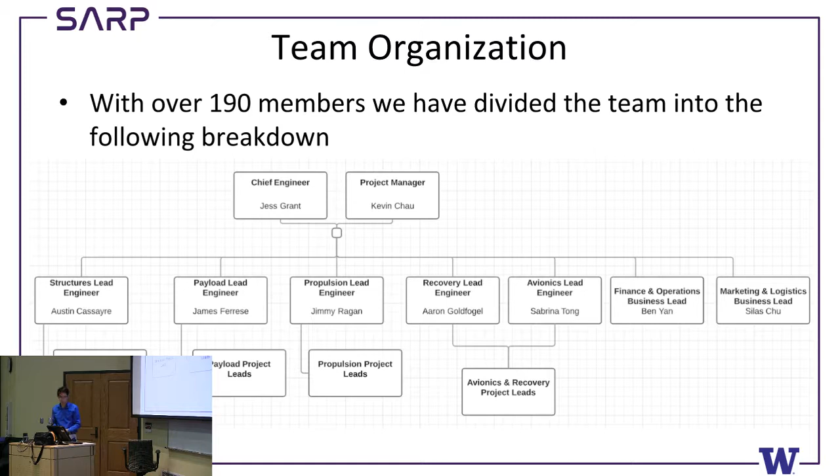For this year's team objectives, team requirements are dictated by IREC, such as reaching a target altitude of 30,000 feet, limited to a Class 2 amateur rocket. Also fully student research and developed hybrid motor, full tracking systems, CubeSat scientific payload of 8.8 pounds, within the normal CubeSat units of either 1U, 2U, or 3U, 10 by 10 by 10 per U. Also a minimum stability margin of 1.5 calibers.

The overall team goal is to have fully wireless launch operations, and this year we're doing a 7.9 inch rocket diameter. Dimensions are about 13.25 feet length with 7.9 inches in diameter, dry weight of 120 pounds, and wet weight of 170 pounds. For wet weight, that's basically the nitrous and solid fuel added on top of the dry weight. We also have a target thrust of 1,200 pound force.

This is a brief overview of our general team schedule. Right now we're in week 10 of fall, which is for PDR and some senior capstone integration, so we're basically on time. Manufacturing will continue through winter till halfway through, then more testing and integration throughout all of winter. CDR may or may not happen this week, depending on how the following designs go and test launch windows, then IREC prep after that for later spring quarter. This year, since UW ends the year a week later, after week 10 we're basically heading down to IREC, so we don't have that extra week to do more IREC prep work.

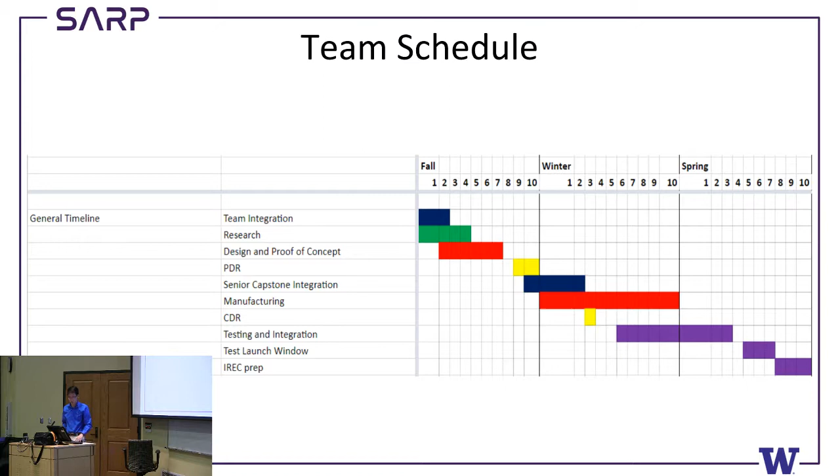So now on to structures with Austin Cassayre.

Sounds like the microphone's working. All right, so I'm Austin Cassayre.

I'm the structures lead this year. Just a quick overview of some of the requirements that we have. From IREC, they basically just want us to make sure that we fully analyze the structure and make sure there's not going to be any surprises in terms of failures, things like that.

COPV is a joint project between Propulsion and Structures that's going to have a special case scenario because COPVs just started being used in IREC last year. Some of our own goals for this year: we set a minimum factor of safety of 2 for all of our components. We also want to integrate effectively with all the other teams, no problems, which makes it easier when we get to assembly.

Some of our research and development projects this year that are big: the composite overwrap pressure vessel, COPV, which will be mentioned in Jimmy's propulsion slides later, and the composite couplers, another big R&D project we're working on for weight reduction.

So just a quick design overview of the rocket. Almost everything you see on the outside is structures. We have the nose cone, the payload coupler, and the parachute inside the upper body tube, both the drogue and the main chute. We have the recovery coupler, which houses the oxidizer vent valve, the main body tube, which covers the oxidizer tank, and the actuated valve bay in between. Then we have the fins mounted on the fin can and the tail cone at the end.

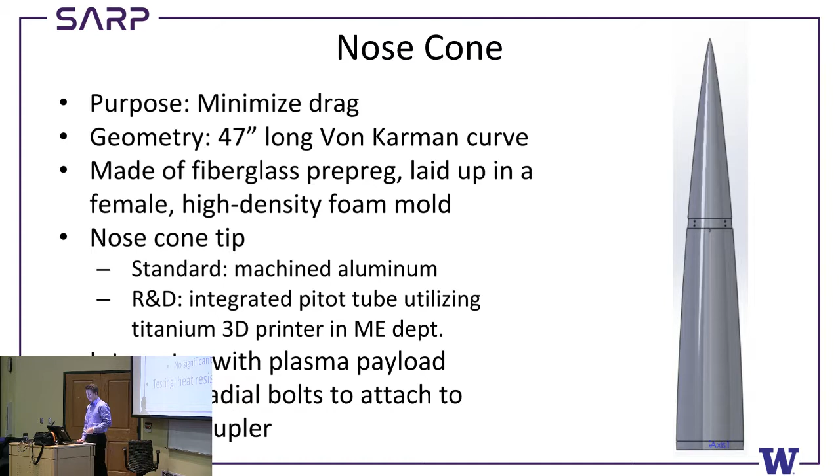As part of integration with payload, there's going to be some holes in the nose cone to hold on their electrodes, and also very small holes for their wires for temperature sensors. We don't anticipate these holes to be an issue structurally, but we are going to run some FEA. We just haven't done that yet.

No issues anticipated there. As far as testing goes for the nose cone, we are going to take the material after we cure it and expose it to extremely high temperatures, in case the plasma heats up the surface a lot, which we don't anticipate too much, but we want to make sure the nose cone doesn't catch fire. So we're going to do testing for that.

And we'll do wind tunnel tests to verify that the geometry we chose is the optimal choice.

The payload coupler, right underneath the nose cone, houses the payload. It has mounting bars in there for it. It also has CO2 canisters for the nose cone ejection, which separates the nose cone and allows the parachutes to come out, and it has the hard point for the drogue chute on the aft side of the bulkhead.

The bulkhead and the sleeves will be machined from aluminum and welded together. The welding will be done professionally, as is the case for all of our welding. The payload mounting bars will be made out of carbon fiber to make them a little bit lighter, and there's going to be a 1/2-inch eye bolt for the mounting point for the drogue chute. There are 2 current CO2 canister configurations.

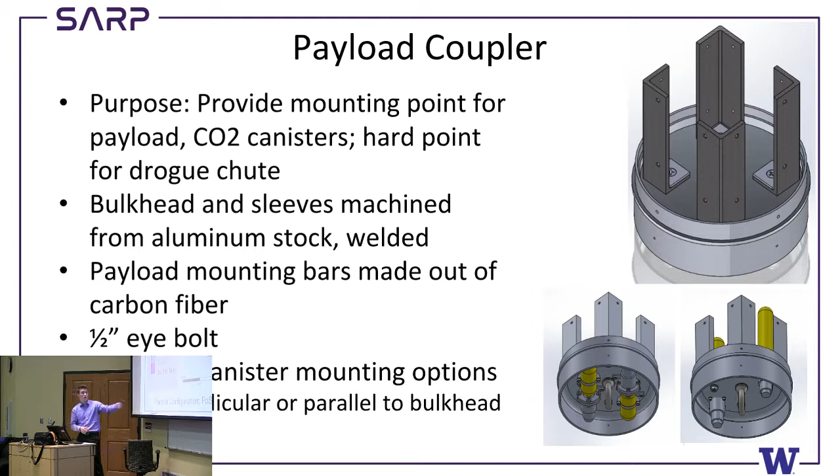There's perpendicular, which is on the right, and there's parallel, which is on the left. We've run analysis for both cases. The parallel configuration has more holes, a little bit smaller, and the perpendicular has 2 larger holes for the CO2 canisters. Both check out above our minimum factor of safety of 2, and the perpendicular one actually shows up a little better. The highest load here is the drogue parachute load, 360 pound force. That's what this is done for, using von Mises failure criterion.

Our airframes - we have 3 tubes that we make. They're all carbon fiber, and they are the aerodynamic surface of our rocket for the main tube, and they also hold a lot of parts together. The top one you saw was the parachute bay, and then we have the Oxidizer Tank shroud, which will be load-bearing this year. The fin can, depending on geometry, will be made the same way, and we'll talk about that later.

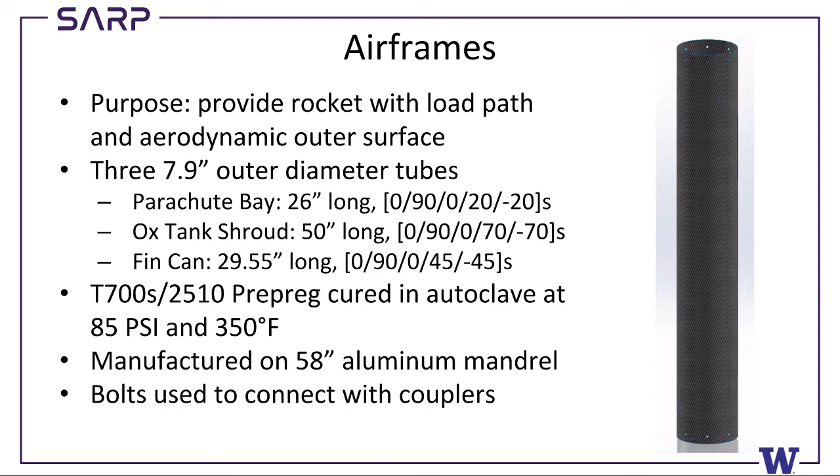The material we use is Toray T700S fiber with a 2510 resin system. It's pretty strong, works really well. We've used it in years past. We use an aluminum mandrel, just a big circular tube that we hand lay these tubes up on. That method is practiced and proven. All of these tubes are connected to all the interfacing components with bolts.

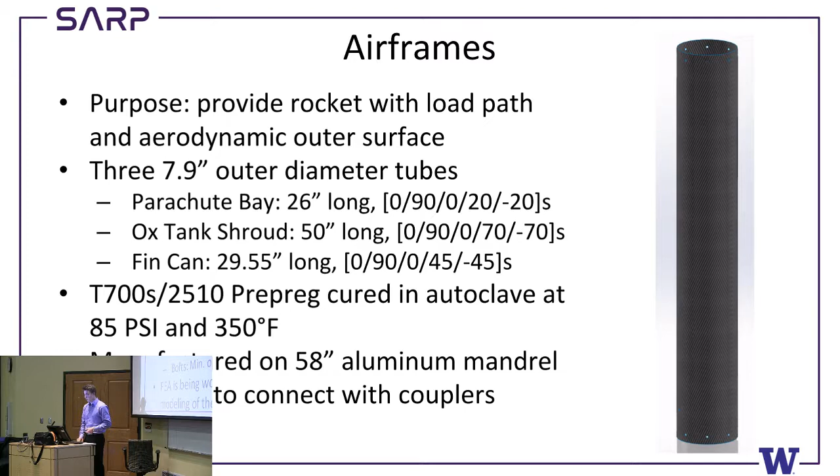As far as analysis for the tubes goes, we have done some FEA with composite ply stack pattern, and we're working on developing that more, but most of our analysis has come from classical laminate theory. As part of our composites course, we've developed a code that analyzes various stack patterns, and we've used that to show that moving away from our traditional 0, 90, 0, plus 45, minus 45 stack patterns helps. Those numbers correspond to the angle of the fiber relative to the 0-degree axis of the rocket, and the direction of the fibers is what takes the load mostly.

By moving away from those plus minus 45, since these tubes don't really have a lot of torsional load, we were actually able to get a higher factor of safety. The upper body tube sees mostly axial loads, so we move those fibers to the plus minus 20 direction. For the main body tube, this is something we're still working on.

You'll notice we have this internal pressure factor of 1,000 psi. Part of that is with the COPV - there's going to be a bonding surface, which you'll see in those slides later, between the COPV and the inside of the Ox tank shroud. It's not a complete contact surface throughout the whole length, but we're not exactly sure how to translate that internal pressure, which is really 800, and we're still working on that FEA to determine how that loading will translate to the tube. So to be conservative, we threw that in there, and we still come out above our minimum factor of safety of 2.

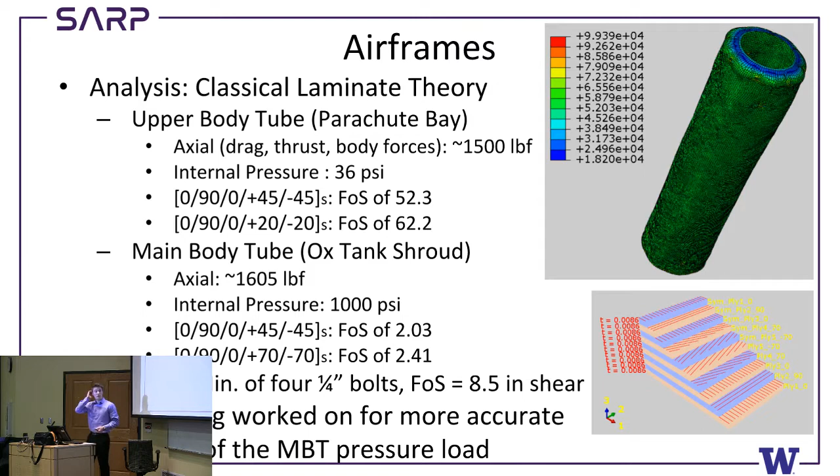Recovery coupler. This has the main parachute hard point, so there's a large force there after deployment of the parachutes. The bulkhead and cage for this are also machined from aluminum and welded together professionally. We will have 3D printed doors, which have worked great the last 2 years. The unsupported column length, which we'll get into on the next slide, is 8 inches for this current design. The eye bolt is 5/8 inch diameter, so it's pretty hefty.

Last year, the mode of failure was buckling in the recovery coupler, so we wanted to make sure we're safe in buckling this year. We used Euler's critical load buckling theory to calculate a factor of safety of 9.4. This L is that unsupported column length we talked about in the last slide, and K, because this is one solid part, we technically have fixed ends, so we're putting a value of 0.5 in there. E is elastic modulus, and I is the minimum moment of inertia for the column.

To verify that with FEA, we calculated similarly successful factors of safety for all the components in the different loads. It shows a little lower in compression, but our max stress is actually right up in those corners, so we'd expect the material to yield there first before the column buckles, which would probably result in the column buckling as well. But again, we have a large factor of safety there, so we don't anticipate getting to that point.

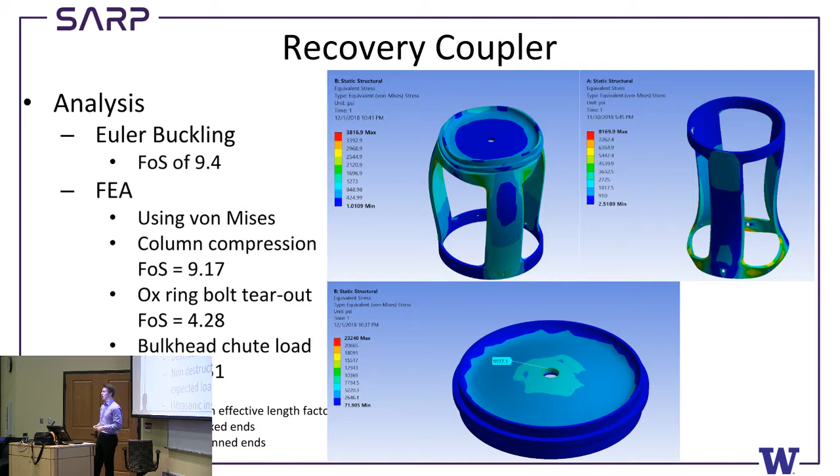So one of those R&D projects I mentioned is composite recovery couplers. This is just a weight savings thing, very R&D at this point. We'd basically be replacing the cage of the recovery coupler with carbon fiber, manufacturing a tube the same way we have in the past, and adding stiffeners on those columns. One consideration we're still working on is making a bulkhead that takes the 1,800 pound force of the parachute load, which is giving us some difficulty. So the backup plan is to still have an aluminum bulkhead, and the conversion from the aluminum cage to the composite cage will still give us a lighter part.

This would require a lot of mechanical testing, some destructive testing, and then proof testing before we would ever put it on the rocket. The fins are our major stability, our major control surface.

We have 4 geometries that we've chosen, which you'll see on the next slide. We again used OpenRocket to determine these geometries. There are 2 options basically for the fin can, which is just the tube the fins are connected to: a cylindrical fin can, and also area rule. Area rule is if you take a look at the cross-sectional area of the rocket along its length, you want to keep it completely constant, and if you do that, your drag over flight will be significantly less than if you didn't keep it constant.

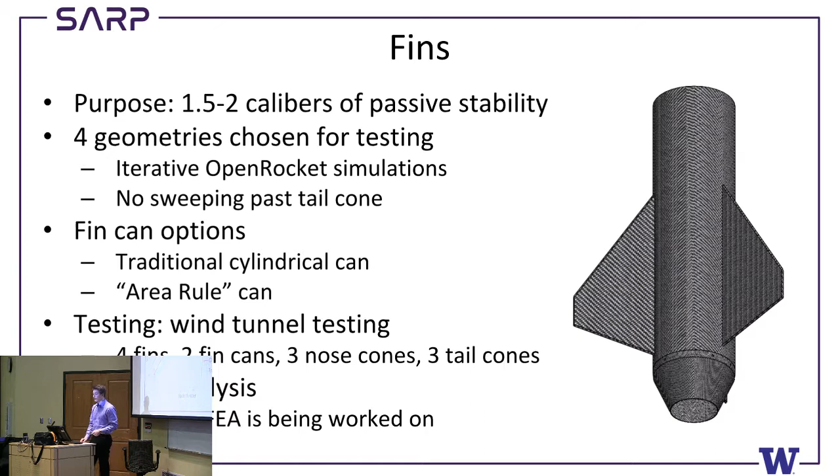So when you get to the fins and add that extra area, you actually have to choke down the diameter of the fin can to keep that area constant. We'll be doing wind tunnel testing to verify which fin geometry is best, and in addition, we'll be throwing in the 2 different types of fin cans, a couple different nose cone geometries to verify that the one we chose was right, and a couple tail cones in there too. CFD and FEA are both being worked on for the fins right now. Currently, this Delta 2 shape is showing the lowest amount of drag and the highest apogee for the rocket.

For manufacturing the fins, we have a honeycomb or foam core, overwrapped with carbon fiber. The 2 options essentially come down to making a fin can, whether cylindrical or with the area rule with a slight waist, and bolting those fins onto the can. It's something we used last year that worked pretty well. If you notice, there are some aluminum inserts inside this foam core from last year, and then they bolt into the tube like that.

There are 2 methods of making the area rule fin can: either this male mold option or this female mold option. You can't really see the area rule curvature that goes into the depth of the page here, but these are the 2 options we're looking into, and we've talked with some of the shop masters over in ME and with some of the professors here, and we seem pretty confident with that.

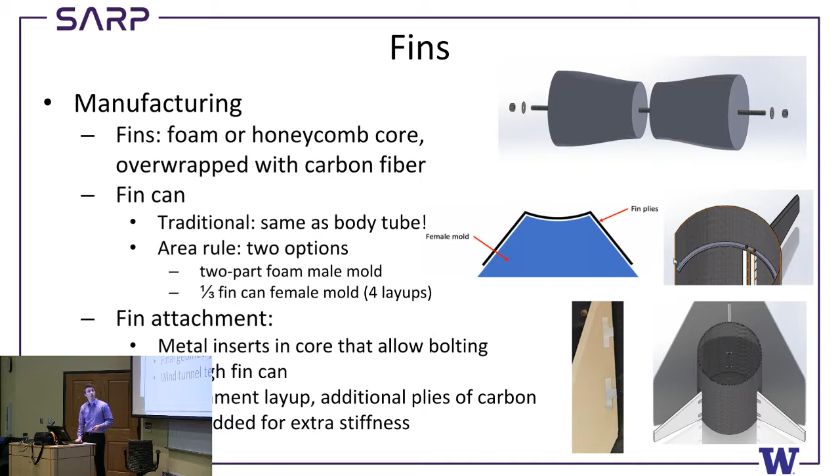So tail cones, the last part we have - the purpose is just to reduce drag again, and they're also made of carbon fiber on a foam mold. A male mold will work too, but foam's probably what we'll end up using. This integrates with the nozzle, so it's pretty much constrained to the nozzle geometry. This transition length is just the axial length from this point to that point.

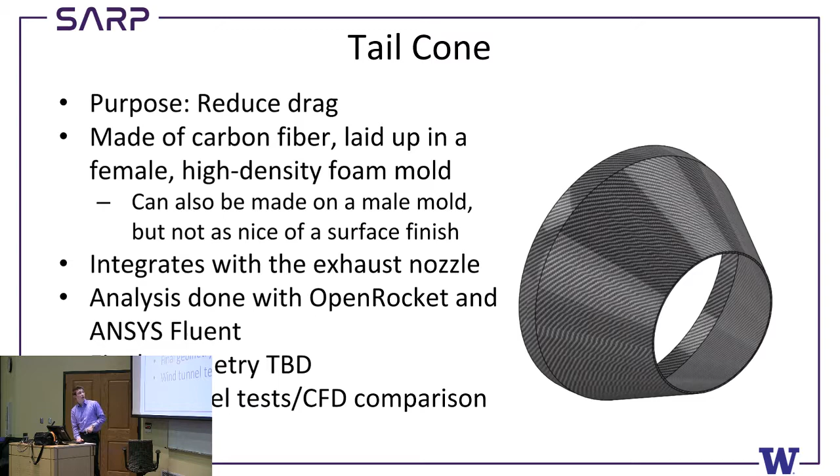Moving forward, we will have all of our analysis complete about a week or two after school starts next quarter, and all testing that would result in design changes will certainly be done by early February. CDR is scheduled there for everyone.

Manufacturing, this includes some backup components that we want to manufacture, and that'll all be done by the end of winter quarter. Proof testing would be after we create those parts before they fly. We want to do proof testing on all of our parts, just 1.5 times expected load in the Instron machine or something for compressive or tensile loads, whatever that may be. Then we hope to do some ultrasonic inspection on our carbon fiber parts, but we have to find someone that can do that.

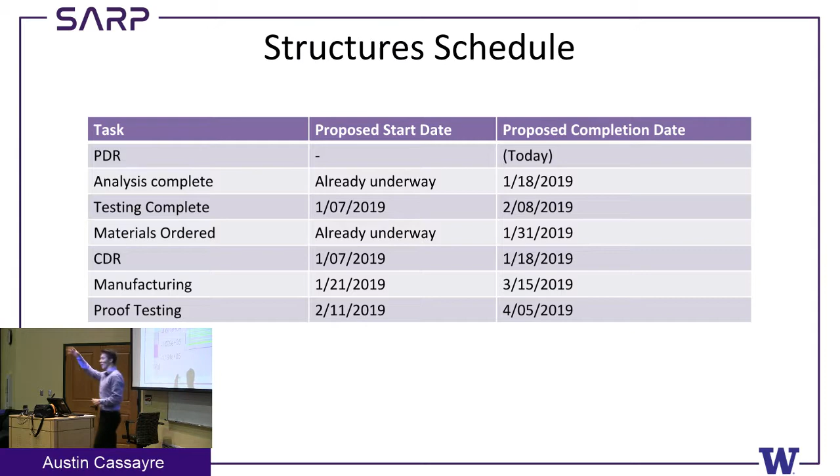Why do we move away from the swept fins? That's a great question. If you look here, you'll see these fins go past the tail cone. They look really cool, but as the rocket comes down on a parachute, it lands directly on the fins and they break. So in an effort to not remake the fins every time we want to do a launch, we are moving the fins so they don't extend past the tail cone.

Any other questions? How do we plan to attach the titanium tip? That's referring to the nose cone. We plan on epoxying it mostly, and that should hold fine, but we will also be looking into potential bolting designs, such as last year there was a piece of all-thread that hooked into a platform that sucked up into the inner side of the nose cone and held the nose cone tip on. That's something we're also looking into, because there will be some electronics that need to be hooked up to the pitot tube to collect data, and that would be a good opportunity for us to mount those there.

So, the question was: will wind tunnel testing be done with a full-scale model or a subscale model? It will not be with the full-scale model — it's a pretty large rocket to throw in the wind tunnel. However, the test model is larger than last year's. Last year's was about this long, and there were a lot of interactions between the test stand and the model in that instance. So we're moving up to a significantly larger test rocket that's 5 feet long — a lot bigger, but no, not full scale.

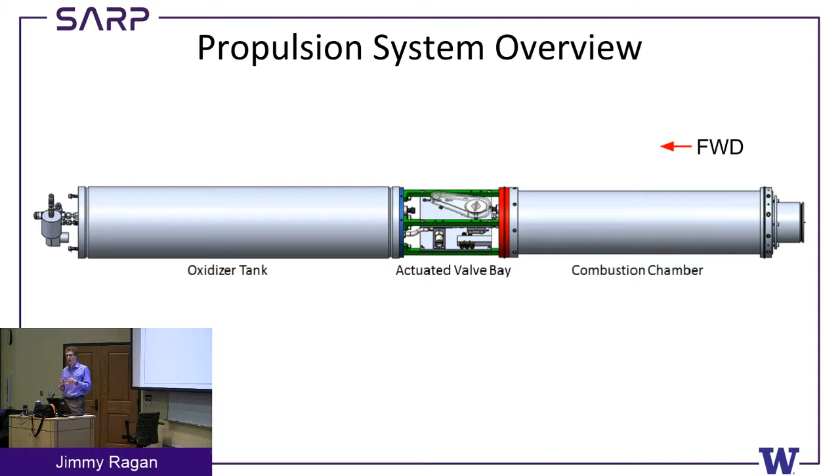So without much further ado, let me get into the design requirements and start talking about what we're trying to achieve here with the propulsion system.

Our total impulse is 9,200 pound-seconds. That's a requirement, the upper limit of what we can do at IREC. That's the top of the O-class motor. So we're limited to that by design, where our design limit is imposed by competition. We could go higher if we wanted to.

Similarly, we have to use non-toxic propellant as well as keep our pressure vessels at a factor of safety of 2. Again, IREC requirements for both of those, as well as achieve a stability of 1.5 calibers of static margin off the rail, which is how IREC defines a stable rocket.

To do that, in past years, we've needed a minimum peak thrust of 1,200 pounds. That's based on last year's weight. So if all the weight saving efforts that Austin and our team are trying to implement go into effect, that number might come down a little bit. Alternatively, we could shorten the launch rail.

We also ourselves have elected to impose a minimum factor of safety of 1.5 across all parts. That's not our IREC requirement, that's just something we're trying to achieve, although most of our parts in the load path are quite a bit higher than that. This is just for things where it's an extremely conservative estimate that we're trying to reach at least 1.5 on.

So some design goals, as always, and as every team's trying to achieve, we want to make things lighter while maintaining the same level of reliability and our factors of safety. But we have two new design goals for this year: we want to have a subsonic trajectory, as well as be able to use a composite overwrap pressure vessel, or COPV, which means we need to be compatible with both our normal aluminum oxidizer tank and that new composite oxidizer tank.

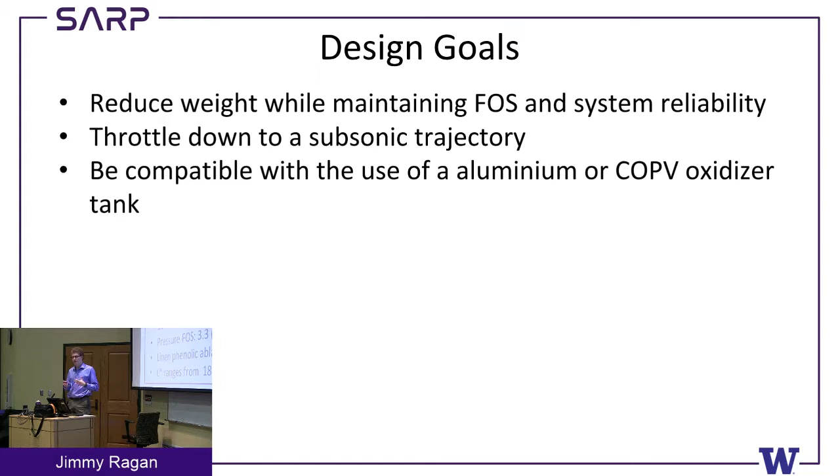We also have a factor of safety of 3.3 on the aluminum combustion chamber, which is the outermost part here, although there are other factors of safety on the other components inside that I'll get into later, if you were to model them as a pressure vessel with no support. We assume a combustion chamber pressure of 500 psi for that calculation, although that's a worst case scenario, and we haven't actually detected much more than a pressure spike at that level.

Our thermal protection is a linen phenolic. That's something we've selected and continue to use based on our flight heritage, although we are working on programs to get out of phenolic and into something a little bit cheaper, and I'll go into that in a couple slides.

Finally, our L-star ranges are pretty similar to previous iterations. That's because we've had a lot of success with these values, and until we get a little bit more time to go and make a more thorough model of our motor, we don't really want to deviate much from this. So that was one of our design constraints: we want to keep our L-stars about the same as they were in previous years because that has had flight-proven success.

Going through the high-level parameters of our motor, we're trying again to hit that 1,200 pounds of thrust, and we do that with 3 pounds per second of oxidizer flow and 1 pound per second of fuel, for a total of 4 pounds per second over a total burn time of 12 seconds, which is a bit of an increase over previous iterations.

That does mean we're running at an oxidizer-to-fuel ratio of about 3, which is pretty fuel rich, but that's by design. We've shown better performance when running intentionally fuel rich, and it also keeps our system from being exposed to the oxidizer directly.

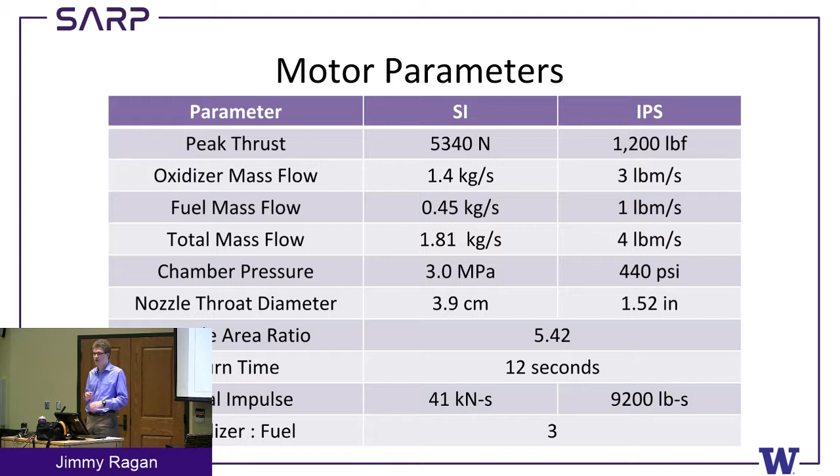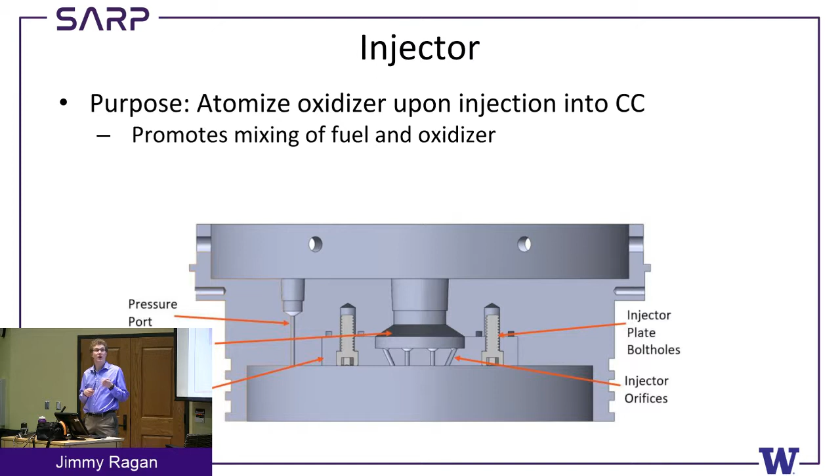I should note that how we determine the quality of our injector plate designs is mostly empirical. We have a couple designs, and I'll show a candidate replacement on the next slide. What we do is run CO2 through it, which is a pretty accurate substitute for nitrous, not reactive, and a lot cheaper. We run that through our injection plates, observe the resulting plume, and basically come up with a qualitative judgment on which one's mixing better, which one's atomizing better. It's mostly an experimental process there.

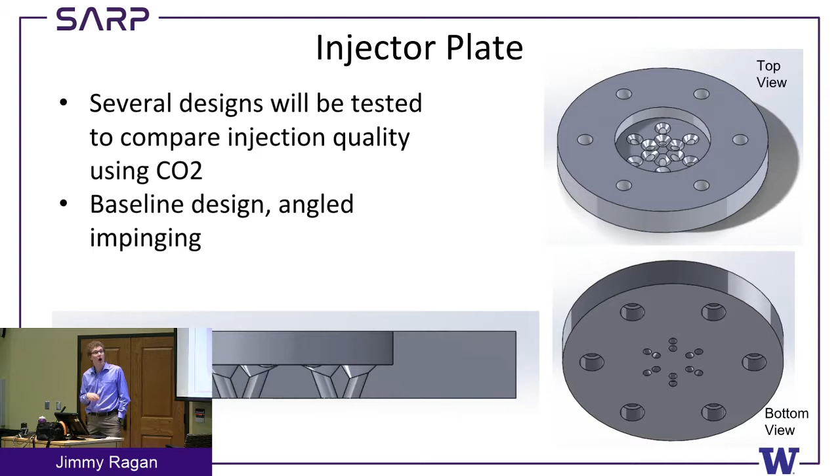Going to the exact opposite end of the combustion chamber, the exit instead of the entrance, we have the nozzle, which is made out of graphite. This is again something we've had a lot of history with and success using, as graphite nozzles are somewhat ablative but also pretty resistant to the high temperatures of our combustion.

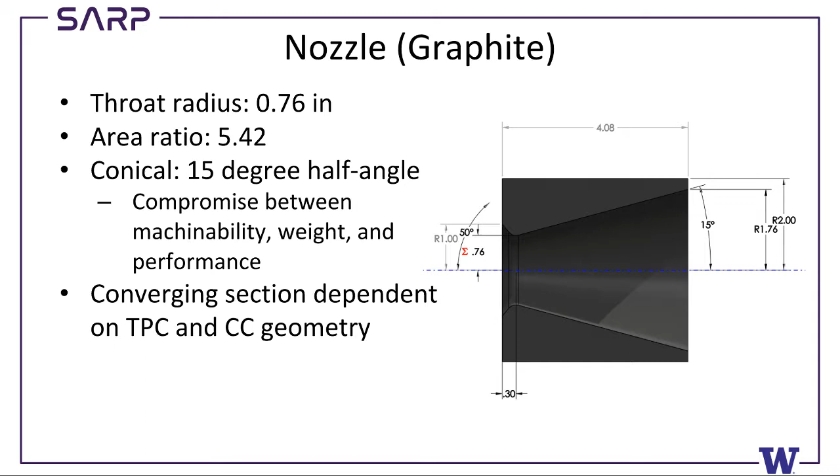I should also note that we have pretty much completely replaced the converging section with thermal protection, which is the next slide. We do this for a couple reasons - the primary one is that's the location where temperatures are hottest in the nozzle, and it's also the location that's going to see the most ablation. So we intentionally replace this with thermal protection so we can have something expendable each fire, and we're not having to replace the entire nozzle over the course of our testing cycle. Ideally we would only make one nozzle per year, and that's what we did last year, and it worked pretty well.

We did make a couple changes to this converging section, mostly that we made the converging rate somewhat shallower to help match the tangency of that angle and the nozzle. If you look really carefully at our assembled CAD, which will be in the next slide, you can notice there's a slight angle discontinuity there, and we wanted to minimize that. However, we were also constrained by the fact that we have a lot of 1-inch thick phenolic stock, and we wanted to reuse it, so that's why we ended up with this result. Note that it's a pretty aggressive converging rate, but literature backs up that this isn't actually a significant concern, so we're keeping it as such a rapid convergence while keeping the divergence at a 15-degree half cone.

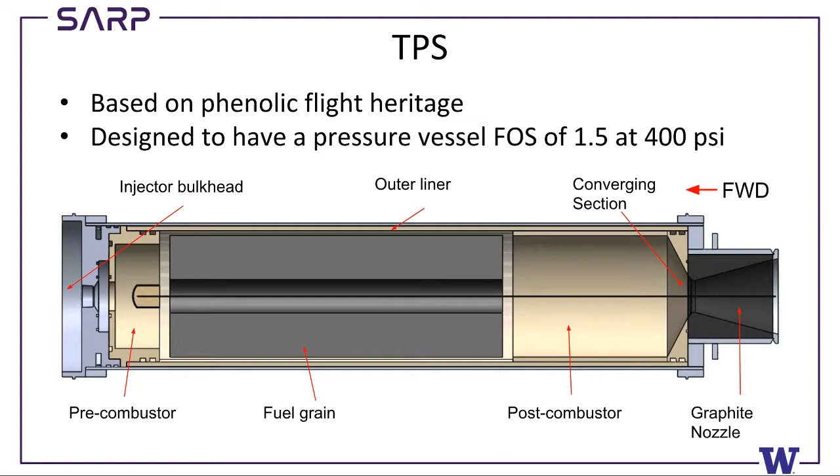It should be noted that we seal our combustion chamber's heat shielding with O-rings here and here, which does create a pressure vessel. So we have performed analysis and have a factor of safety of 1.5, using the closer combustion pressure of 400 psi. Note, however, that this is a pretty conservative estimate because it assumes no support from the combustion chamber on the heat shielding, which isn't true in actuality. We've intentionally made this decision because we've noticed in previous years that our main failure mode for this heat shielding is gas paths leaking out, usually in the precombustor region, and not due to pressure failure.

So we've intentionally blocked that gas path and accepted the pressurization of the heat shielding. It's something that has worked pretty well for us in previous iterations, so we're keeping with it.

However, probably the biggest issue with our heat shielding is the fact that the precombustor is fairly expensive and time-consuming to manufacture. Part of that is due to the fact that it's made out of phenolic, which isn't a very cheap material. So one of the things we're looking into this year is replacing the phenolic in the precombustor with a different substance, in this case wood or wood composite. The reasoning behind that choice is that wood has similar ablative properties, especially certain composites of it, and some of them use phenolic resin to make the composite. So we believe that we can come up with a cheaper alternative and something that's a little bit easier to manufacture that can achieve the same results.

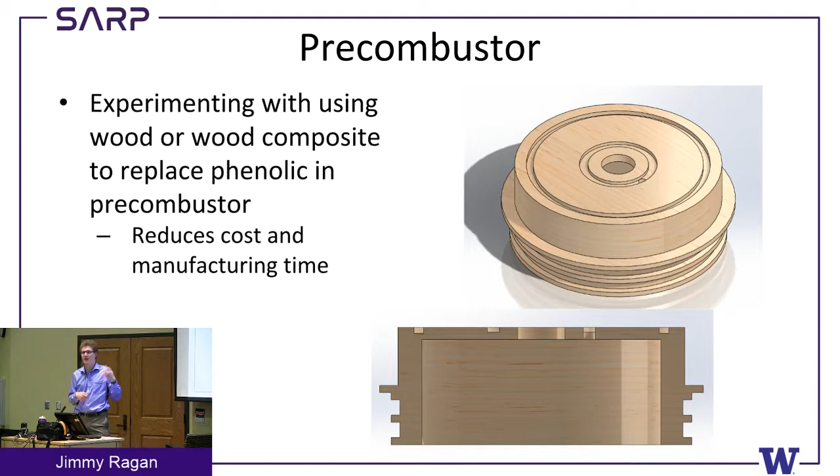So it's something that we have yet to design a test to actually compare the two, but it's something we'll be doing in the winter. We're making a precombustor out of phenolic and making one out of wood, and then basically subjecting them to the same conditions and comparing their ablative properties. We hope that this will help save time and money in the long run, as well as be more pleasant to manufacture.

Moving into the core of that combustion chamber, the fuels, obviously what makes the rocket go. There's a lot going on in the fuels, but basically the purpose of the fuels is to provide that total impulse while not causing any detrimental instabilities, such as the fuel grain cracking and sloughing off, or other instabilities of it stuttering or going in and out.

We use paraffin wax as our fuel, partially due to our long history and also due to how easy it is for us to manufacture it. And then we mix in various additives to the paraffin wax to create a fuel that has a higher regression rate and higher tensile strength.

How we determine which additives to add is a bit of an experimental process, just like our injector. We have various additives that we've used in years past and that literature has suggested have the results we want to see. And we make a couple different compositions and test them in our subscale setup.

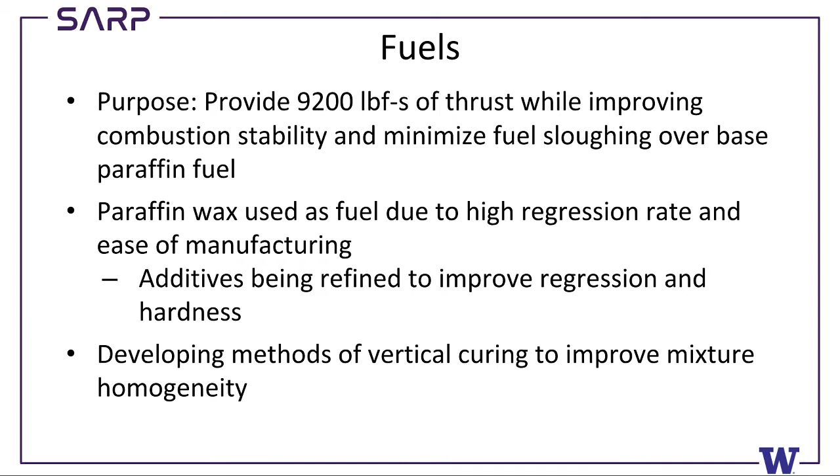One thing I should point out before I go to some of those mixtures is that we're trying to implement vertical curing instead of the spin casting we've done in the past, which is a bit of a step backwards to something SARP had done originally and then moved to spin casting because of detrimental air bubbles. But we have a potential solution to the air bubbles in the vertical pour, and we have noticed in the past that spin forming has resulted in inhomogeneities within the fuel, which has meant that additives have separated to the outside when spun, and we'd like to remove that effect. So we're going to try pouring vertical and see which one is most difficult to work with. We have a couple ideas we want to try out.

So some of the fuel mixtures, there's quite a few of them and there's a lot of additives, so I'm not going to go into too much detail. If people have questions, feel free to ask. But essentially, all of these additives are being added to achieve one of two effects: increase the regression rate, which provides more thrust, or increase the hardness, which prevents instability.

This control composition is what we flew last year. This one is using larger aluminum because we would have liked to use 3 micrometer aluminum, but we didn't have that on hand, and now we have a source. And then this is another one that we've had history with. What we're planning on doing is iterating slightly from each of these controls to see what the effects of adding each additive is. It's building on research that we've done in the past and trying to extend it forward.

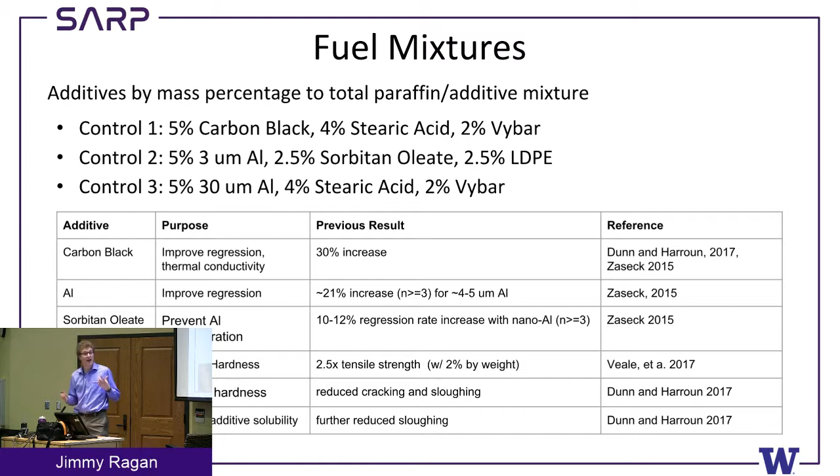So moving outside of the rocket entirely, we've talked a lot about the fuel and what's inside the combustion chamber. How do things get inside the oxidizer tank? We do this pretty much completely remotely. We have a remote fill system that was developed largely last year and the year before that allows us to remotely load oxidizer and pressurize our tank without having any personnel on site, which is a great safety feature.

We'd like to continue using the pneumatic ball valves that were so successful last year, but we'd also like to increase the line size and have a faster fill rate, because that was one of our biggest challenges in competition - the fact that we couldn't fill within a half hour as we would have liked to.

The fill procedure is fairly simple. We initially purge the tank with nitrogen to clear out any oxygen or anything else that could potentially react with the nitrous. We flow nitrous and try to fill the tank to our desired weight - for launch last year that was 36 pounds, although the tank can hold up to 40. Then we back pressurize with helium to achieve the desired tank pressure, which is 800 psi.

For static fires, where the rocket isn't going anywhere, immediately after the fire is finished we purge with CO2 to put out any fires that might be on or around the rocket or otherwise causing problems.

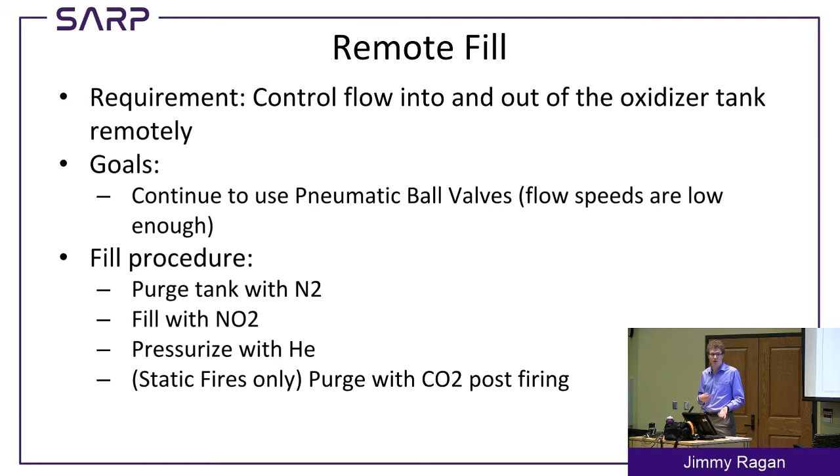During launch, we need to detach our fill line from the rocket. That's achieved using our fill arm, which was largely developed last year. This is the finished fill arm or detachment mechanism, and that's not changing significantly except the line size is going up to a half inch. Otherwise it's the same scheme: remotely detach the arm and separate from the rocket to allow it to fly free.

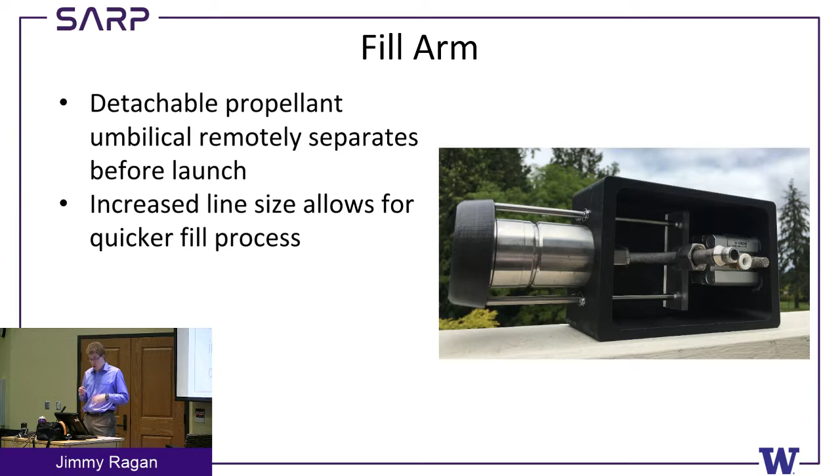So going into the big changes this year: the first is that we want to implement throttling, as Austin alluded to with talking about various tail cone designs. We'll do that in the actuated valve bay. The actuated valve controls the flow of oxidizer between the oxidizer tank and the combustion chamber, using a ball valve that is, for launch, rapidly opened by a vane actuator. That actuator takes about 1/10 of a second to open the valve from full close to full open.

The reason for that is because the throttled trajectory stays subsonic, never going above Mach 1, which means it avoids a lot of the wave drag from heading through the sound barrier - a big potential saving in efficiency.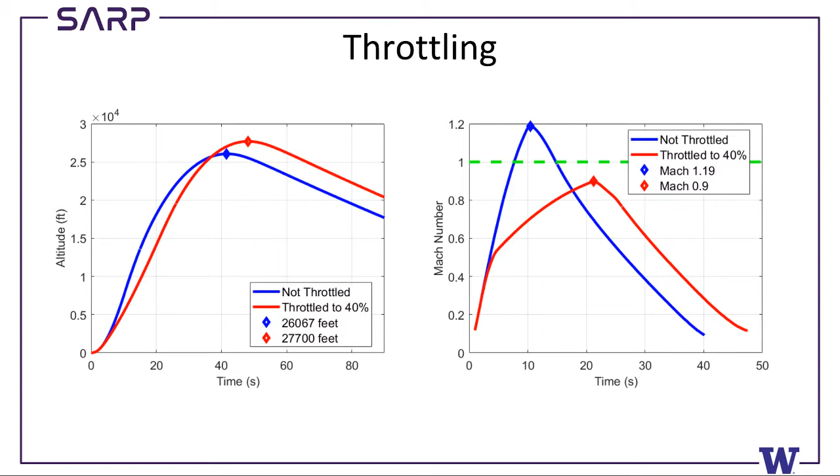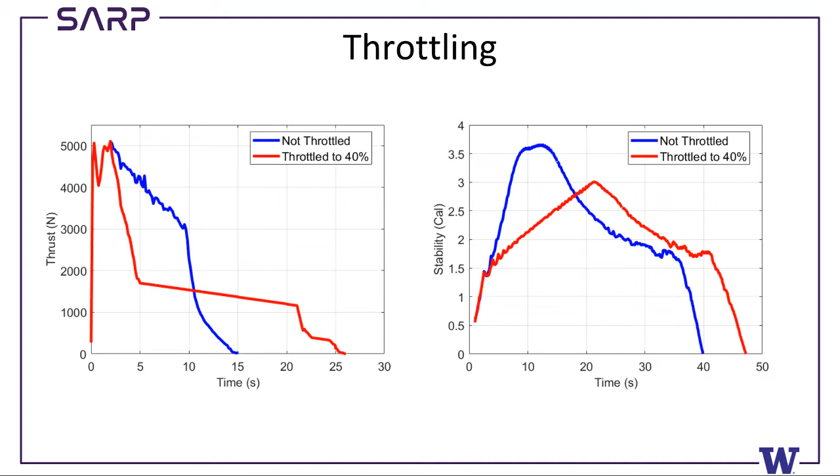Some more graphs informing this analysis: basically we took last year's static fire data to get a thrust curve and assumed that 2 seconds after ignition we had started to systematically throttle down, for about 2.5 seconds, to 40% of the thrust, then kept this decay trend but scaled to 40% and kept the impulse constant. So there's a lot going into this, and this is what we input as the thrust curve.

A lot of these assumptions aren't fully solid, which we're going to have to test and see what the properties are. But one thing to note is that we achieve the same stability as the unthrottled rockets - we're not losing anything there, and there's potential for a lot of altitude gain, so we're going to pursue it.

How we're going to do that is pretty simple: we're going to add a stepper motor to the same chain that is currently turning the vane actuator. When we go to ignite, the stepper motor will be unpowered and forced open by the vane actuator. Similarly, when we go to throttle, the vane actuator will be vented and can be closed by the stepper motor. The stepper motor will close quite a bit slower than the vane actuator opens, but that happens in flight when we're already off the rails, so it's not as big of a concern.

Obviously, this is something that's going to be subject to heavy testing to see if we actually get the performance we're anticipating, as well as what losses are present in the system, because when you have a valve that's partially closed, we're anticipating that we're going to see some pressure losses. We're just not sure what.

So it's something that may or may not work out, but one of the advantages to this scheme is that if it turns out that throttling is not worth pursuing, the only thing we have to do to change back to last year's iteration is remove these 2 gears and shorten the chain. So it's pretty quick to move to an unthrottled flight.

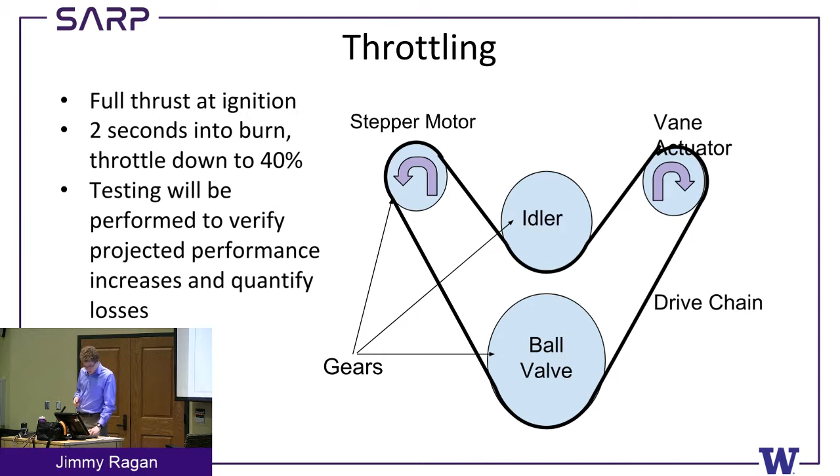So we think that this is something that's worth pursuing because we're not really risking anything. A little bit more of a dramatic change is we'd like to change the oxidizer tank to have a hemispherical bulkhead, and this is because we're hoping to implement some weight savings from taking advantage of the fact that the interface requirements up here are pretty simple. It also has some similarities with the COPV, composite overwrap pressure vessel, which is something that we will— excuse me, it has some similarities with the COPV. So that is something that inspires us to try to implement dome geometry with the traditional ox tank to see if we can achieve that.

The parameters the ox tank has to satisfy: it has to hold up to 40 pounds of nitrous at up to 800 psi. Note that that's a derating of our ox tank from previous years. We used to rate them to 1,000 psi within a factor of safety of 2 to 2,000 psi. We're still designing to 2,000 psi. We're just lowering the operating pressure because we never actually use 1,000 psi in the field. This will just make proof testing a little bit gentler on our systems.

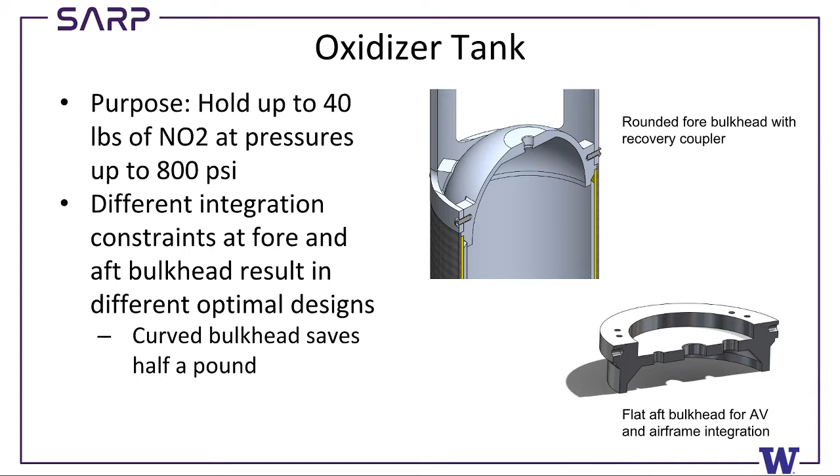One thing to note is that while we have a curved bulkhead at the top, the requirements at the bottom are not so easy to work with a curved bulkhead. So we're going to keep a flat bulkhead at the bottom of the ox tank to aid with that integration with the actuated valve. Showing the completed assembly, you can see that one side's flat, one side's curved. And the factor of safety on this design is currently at 2.7, but those are just hand calculations. FEA is currently ongoing, but it's something that we haven't had a chance to work on.

Also, this analysis suggests that we can decrease the thickness to 0.2 inches, and combining that with the bulkhead change potentially could be a 9-pound saving over last year's oxidizer tank, which is pretty dramatic. However, we need to complete our FEA to see if the welds are going to be able to hold up to that thickness decrease, and it's something that we're not entirely sure of, so this weight savings may come back a bit.

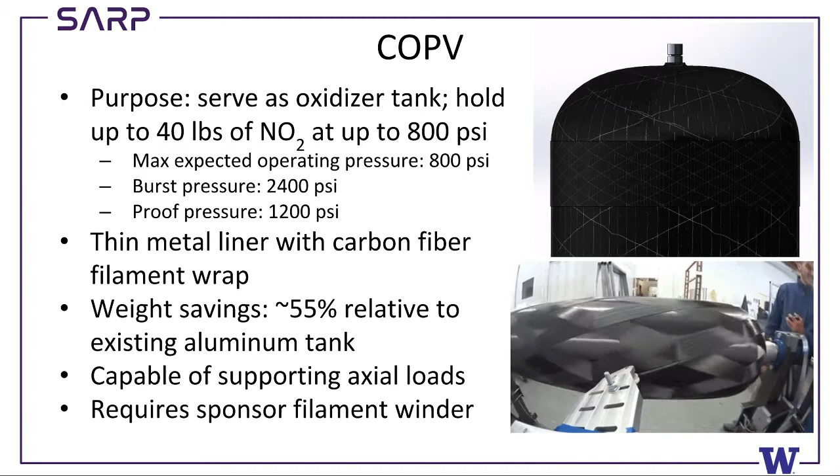Which leads me to something that Structures and Propulsion has been collaborating on, which is the composite overwrap pressure vessel that we've been alluding to. This is kind of the same mission as the oxidizer tank, which is to hold the nitrous and hold it. In this case, it's being designed for up to 2,400 psi because IREC specifies any composite tanks must have a factor of safety of 3. But because it's wrapped with carbon fiber, it represents potentially 55% weight savings over even the trimmed down design that I just showed you. So this potentially could be a huge weight savings for the rocket, which translates to a huge altitude gain without any need to increase impulse.

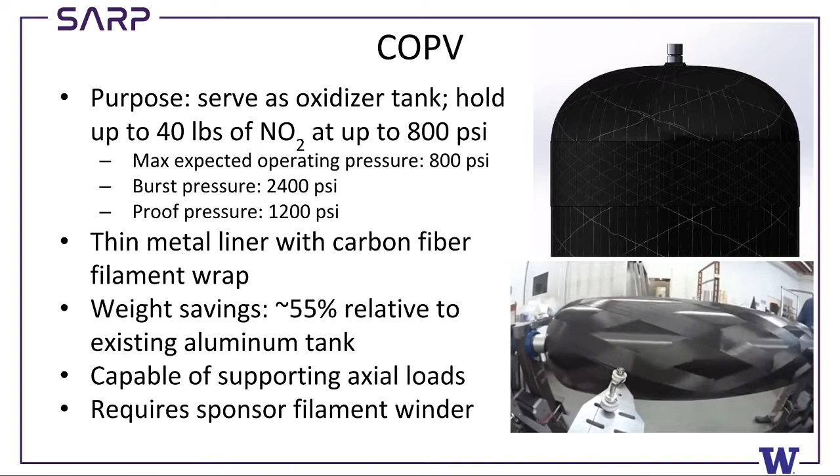How it's made is not too complicated. Basically, we make an aluminum skin like we'd make a traditional oxidizer tank, and then we wrap it with filament to provide that strength from the composite, so that the skin's holding the oxidizer in, but the composite wrap is what's providing the strength. This, of course, will require access to tools that we don't have on campus, so we're hoping to get a sponsorship to be able to use a filament winder.

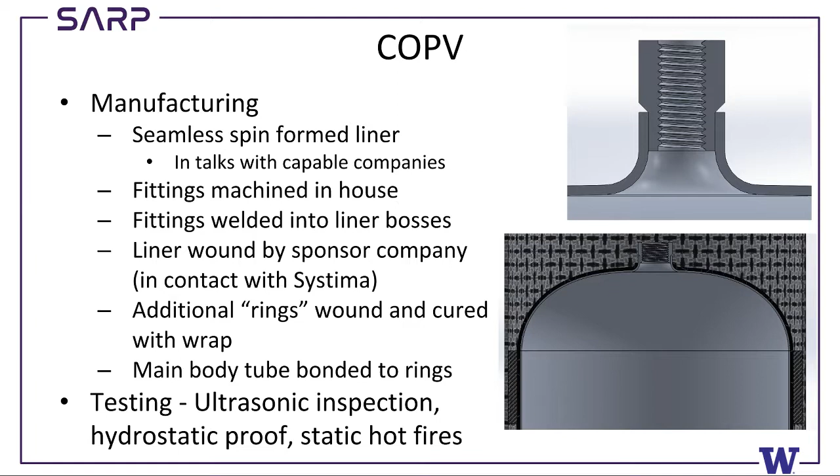I'll go into details of how the COPV is going to be manufactured. First we have to make that skin, which requires spin forming it. It's something that a couple companies in the area have the capability to do, and we're in contact with them to see if they will sponsor us, or at least see what their price is to do so. But by spin forming, we can avoid using any welds to make the bulkheads and the tube.

It'll be just a continuous part here, which will help reduce weight and make winding it easier, which is something that we hope to do with Systima. We're in contact with them right now.

One thing to note is that the fittings on the COPV would not fit into the thin metal of the skin, so they'll have to be welded on, which is something that we will have to make in-house and just attach with welding, again, professionally done, as Austin mentioned.

Finally, it's hard to see here, but we will use the winder to wrap some extra thickness to make a ring around the COPV at both the aft and fore ends, right before the transition to the bulkhead, which will then be bonded directly to the main body tube. This removes the COPV from the load path, not because it can't hold the axial loading—our analysis shows that it can—but because we're concerned about unexpected buckling modes from the thin skin. So we decided it wasn't worth putting it in the load path for the first year of flight.

One thing to note is that because this tank is a completely new design challenge for us, it'll require methods like ultrasonic inspection that we don't have on site, but we're hoping that we could also get that through a company like Systima if we're able to get access to their filament winder. That's something that'll have to be discussed in the next couple months. So it's on the horizon, but it's something we're excited for.

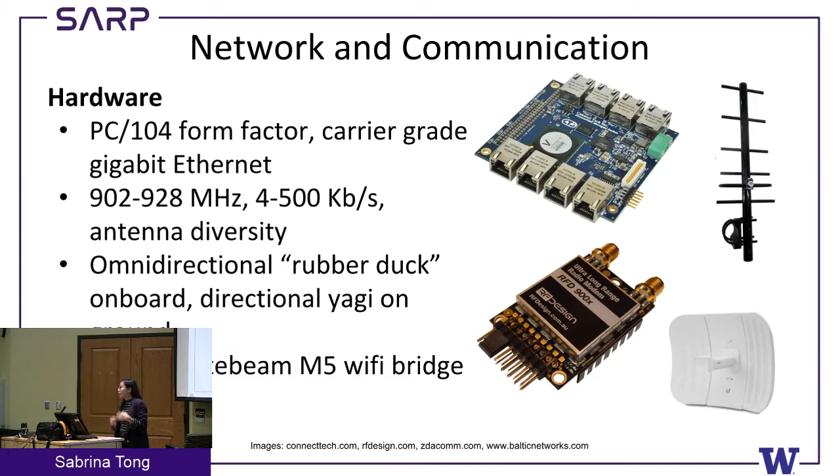So here's some of the hardware that we are looking to use. This right here is our Ethernet switch, and it currently has space for 8 computers. This year we're not looking to use 8 computers, but we want to allow for growth in future systems. The radio that we're using is this one.

We're looking to use the 900 band, and you can see here that it has space for 2 antennas. It's because this radio will choose between the 2 antennas depending on which one has the better signal to transmit on. We're choosing to use little rubber duck antennas for this onboard radio due to the space constraint.

So the system will be located within the actuated valve bay, and to save on space, we're choosing to use these smaller antennas. We're hoping by having 2, that's going to give us a better chance of getting the data back on the ground.

We're also planning to use a Yagi antenna to receive this on the ground. Lastly, the thing that's included is a system that we were actually using last year, which worked really well and reliably, which was these Ubiquiti LiteBeam M5 Wi-Fi bridges.

So this next project is flight data, and its main point is to collect data that we can analyze in the future, so that we can see how well our design of the rocket performed. This system will also be collecting supplementary tracking data that will be transmitted back to ground, so that we can ideally use that data to actually find the rocket, which is kind of important.

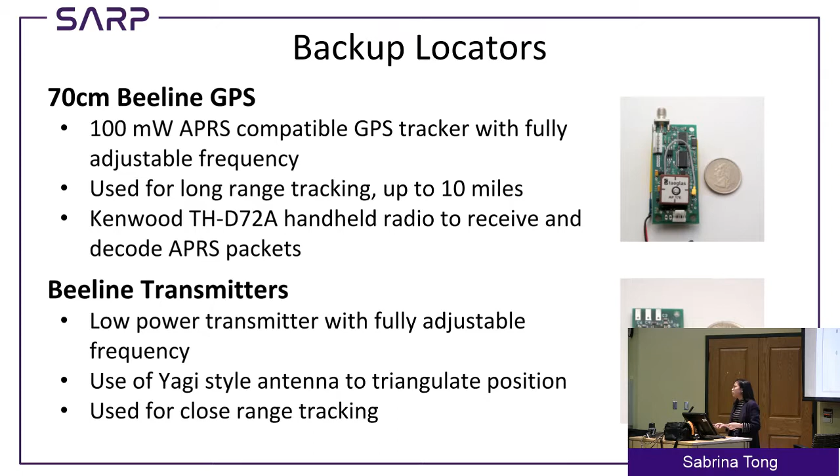Most of all, we want to make sure that we find the rocket. So we do have commercial off-the-shelf tracking beacons on board the rocket as well. We have an APRS unit, and then 2 low-powered tracking beacons on board the rocket. These worked reliably last year and have a lifetime of 2 days with the batteries they have.

In regards to testing, we have some different types of testing that we want to perform. The first type is a subscale launch. The idea is to put our avionics systems onto a smaller rocket, launch it, see how it performs, and also test how our telemetry performs while it's in the air.

Secondly, we plan to do vibrational testing. In the civil engineering department, we have a vibrational table that they're willing to let us use, and luckily we get to do that for free. We're planning to do so in order to test the structural integrity of our housing.

And then lastly, we plan to do temperature testing, just to make sure that we can withstand the desert heat, which last year looked to be about 120 Fahrenheit.

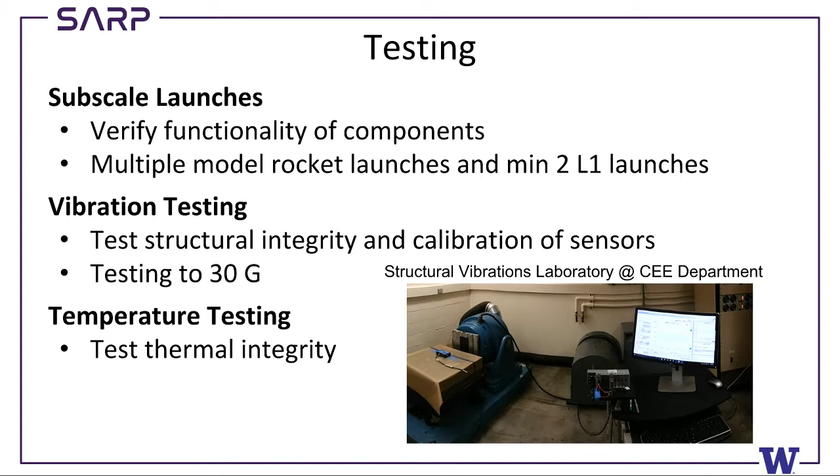I want to quickly talk about what our launch sequence looks like before I talk about our control schemes. The first thing we do is arm everything while we're still at the launch rail. We arm the recovery systems, and we also arm all the control systems. That includes checking all of our valves and some physical switches to make sure that our igniter doesn't go while we're anywhere near the rocket.

After we leave the launch pad, we begin filling procedures. After the fill procedure is done and we've reached our desired weight, we disconnect our fill line from the rocket, which is something Jimmy talked about during his section. We get a go from all of the leads to make sure that we're all set and ready to go.

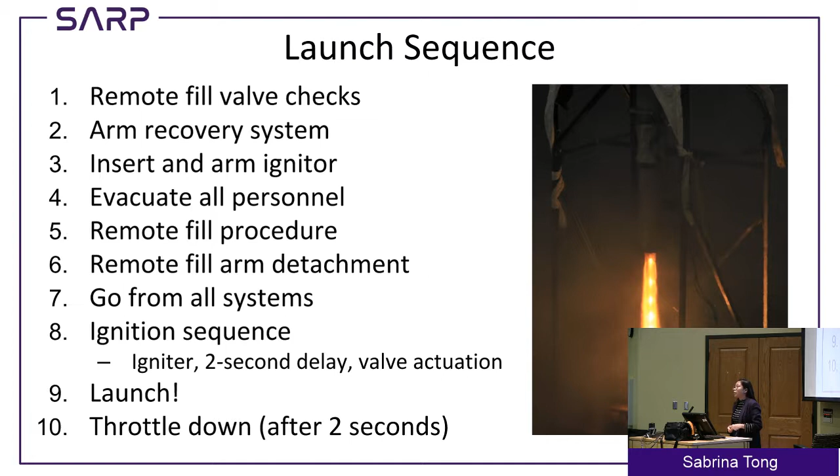Then we begin the ignition sequence, which involves lighting the igniter. We have a 2-second delay after the igniter before we actuate the valve that injects the oxidizer into the combustion chamber. Then we launch, and ideally after 2 seconds, we throttle down by actuating the stepper motor that Jimmy talked about in propulsion.

The first control system I'll talk about is the ignition and injection control. This is what's lighting the igniters and actuating the vane actuator as well as the stepper motor. This system includes Arduinos both on the ground and on the rocket, because the two things we're trying to do are in separate places - one at the launch rail, one on the rocket itself. All of these computers need to communicate with each other and the ground station, so we've equipped each with an Ethernet shield.

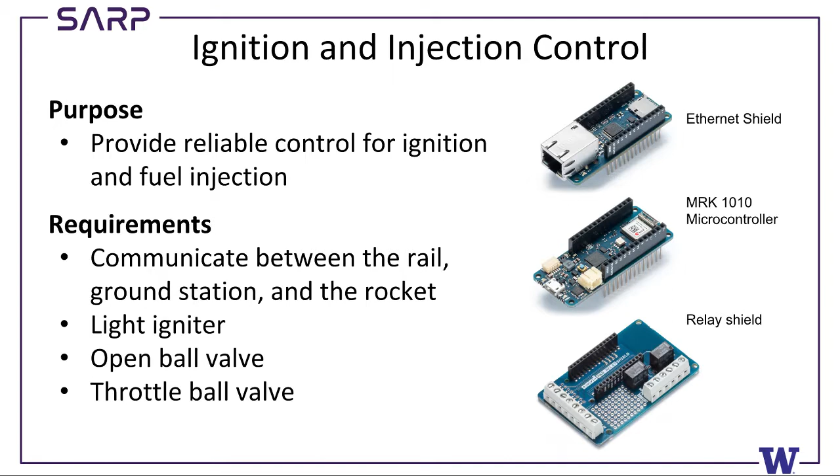Third, we want to see the batteries and the voltage of the batteries to see whether maybe it's not fully charged, maybe we need to switch them out, maybe a LiPo is not holding charge. We then have the functions that actually have to do with firing the rocket. First would be to arm it, so that's the software arm. Then we have fire to start the ignition sequence, and then we have an abort to force a cold flow if we have to - that's just dumping the oxidizer tank through the combustion chamber without lighting the igniter.

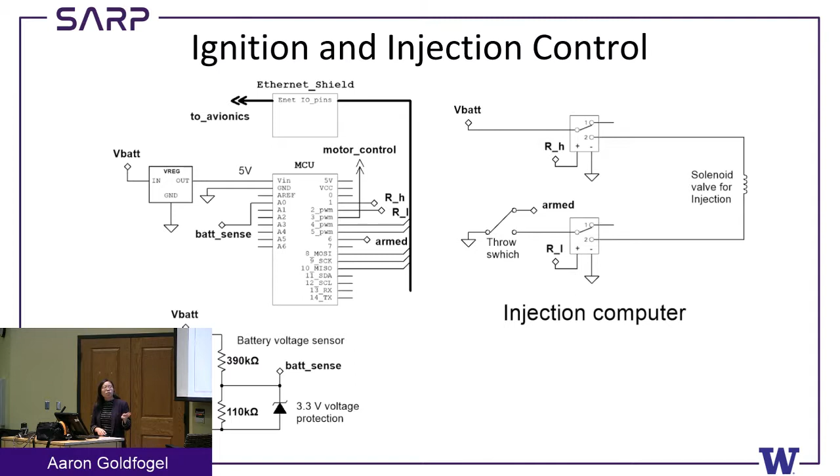So this is the schematic for the injection computer. It is not including what we would be using to control the stepper motor for throttling. That's something we're still developing. But there are a lot of similarities here to the other one.

In this case, we only have 1 computer that is controlling this part of the sequence. But the same idea here for testing our battery voltage, and then this would be the relay schematic to actually actuate the solenoid.

Lastly, I want to talk about remote fill control, which is a really important thing that we have, and we're always really proud of having this system because we like to say that we were doing this before anybody else was doing this remotely. But last year was the first year that we did it through wireless communication. We are going to continue to do that again this year. This system is one that's controlling the valves as well as the disconnection of the fill line. And it's going to be taking pressure data as well as weight data in order to assist with that.

So because we're working with some pretty dangerous gases like nitrous, we want to make sure that we have a lot of built-in redundancies. So that is going to include some software and hardware devices to make sure that we don't have valves open when we don't want to, or valves closed when we don't necessarily want to. Then again, we always want to make sure that if things were to fail, they're failing in a safe manner.

So the first thing that we do is we actually make sure that the valves themselves are set so they're naturally open, so that in the case that we lose power, then everything vents properly. We also want to make sure that we prevent certain valves from being opened at the same time. And if our network were to drop at any point, we can actually see that and then trigger the safe mode to vent everything again.

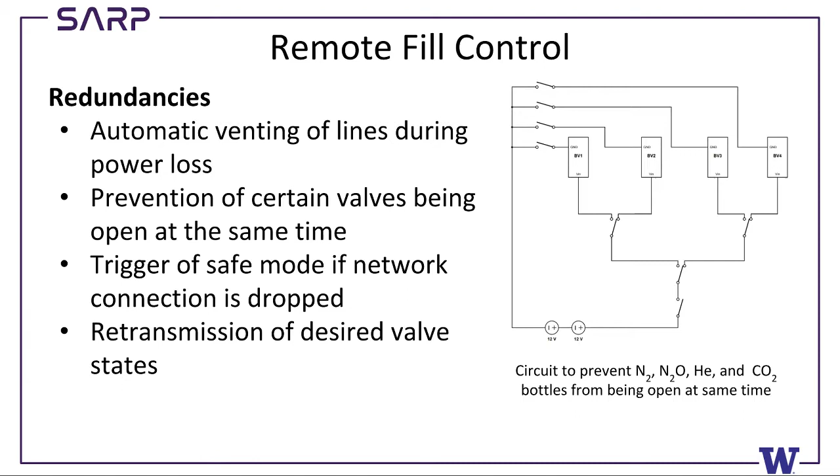And lastly, in the way that we communicate these instruction packets between the control station and the launch rail, we retransmit our desired state of every single valve, so that in case some packet gets mangled, upon receiving the next one, it resolves itself. You can see here a diagram of what we would do to prevent like four bottles from being opened going into the fill line at the same time.

We've kind of changed these switches are meant to represent relays, but we switch them to switches just to make things less cluttered. But the idea is that between these 4 valves, only one of them can be open at any time, and that's just a hardware redundancy.

So here's the control flow that we plan to have for both manual and autonomous fill. We are developing an autonomous system to fill this. So ideally, we press a button, step back, and it just kind of does its thing. But the idea is that we fill and we look at the pressure differentials. If the pressure between the oxidizer tank and that of the bottle seem to equalize, then we vent the oxidizer tank to recreate that pressure difference. And we just continue this process until our targeted weight is reached.

And then at that point, we would disconnect the lines, and then we'd move on to the actual ignition sequence. This is actually my last slide, so I am now open to questions if you guys have any.

Questions? Yes. So the question is whether the network that contains the telemetry link and the Wi-Fi bridge are on the same network. In a black box sense, yes. So we're working on an API to provide that functionality, so that if you're a computer on the rocket, then you can easily access a computer that is not on the rocket, that is through the Wi-Fi link.

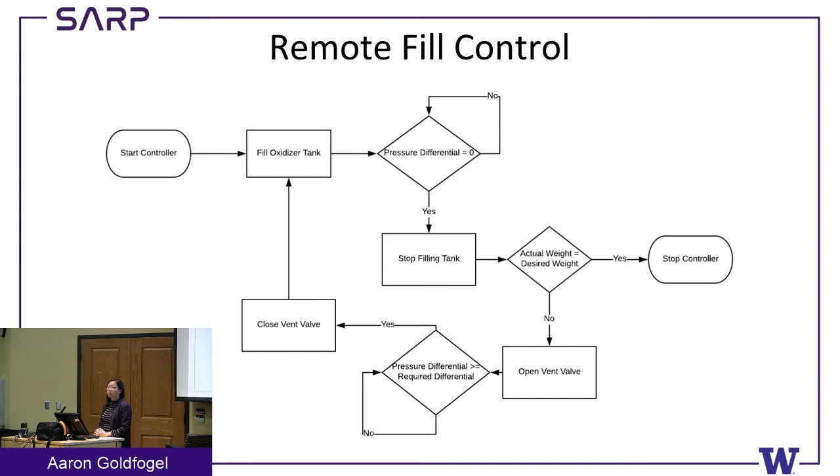So the question is, do I know how powerful the radio is? And I don't, but Oliver does. So for the online viewers, it will be a 1-watt radio.

So the network and flight data systems will both be placed in the actuated valve bay of the rocket. The question is where they were going to be. Yes.

So the question is surrounding the actuated valve bay, if there's carbon, if that's going to be an issue for us. So that particular portion of the rocket was actually surrounded in fiberglass last year, which is RF permeable, which is what we plan to do again this year.

The question is whether we were considering heat and Raspberry Pis, since teams last year had issues with that. We actually didn't find any problems with the Raspberry Pis we used last year. It's something we're always thinking about, which is why we're planning temperature testing with our system. Most of our stuff is also shrouded in components that are generally white, and I think that helped us last year. I don't have concrete data until we do the temperature testing, but we seemed to fare well last year in that regard.

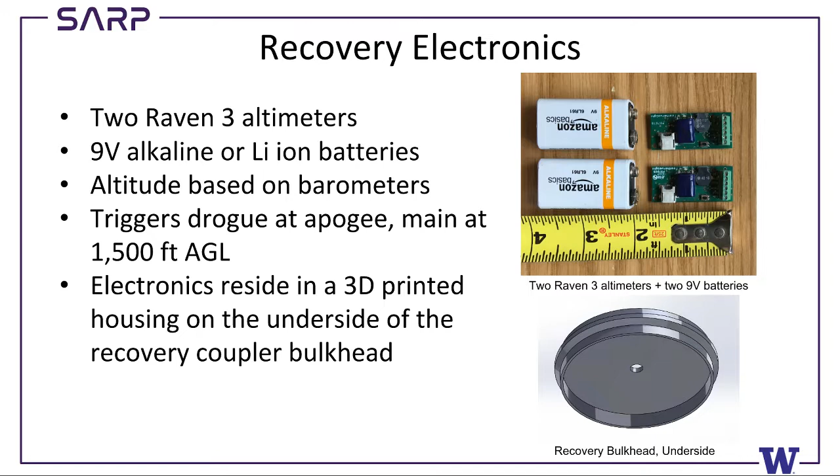When they detect apogee, as in the barometric pressure stops going down and starts going up, they will send signals to various pyro charges. They are set up to be connected to E-matches, which are wires with a little bit of pyrogen on the end. When they are sent a current by the altimeter, they will spark a little bit, and hopefully they're right next to some black powder, which will spark a bit more and make something happen.

They will be housed inside of a 3D printed enclosure, which is something that we've done the last couple of years. That enclosure will reside inside of the recovery coupler on the underside of the recovery coupler's bulkhead, where they will be nice and safe as well as exposed to barometric pressure so that they'll know how high we are.

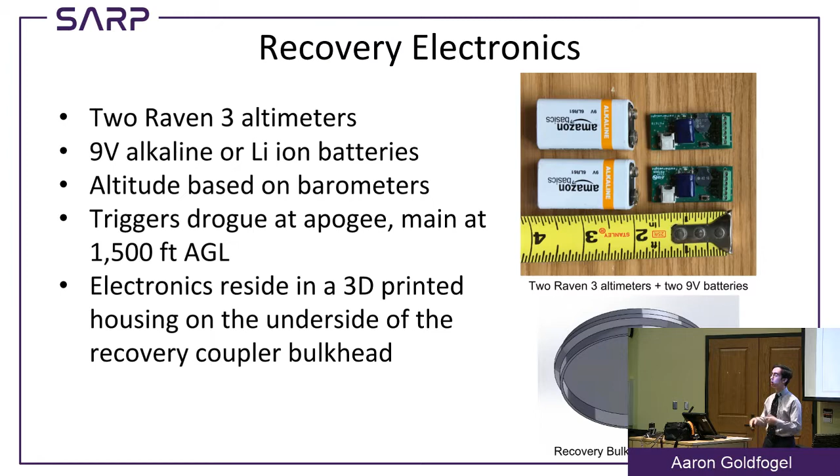Moving on to the systems actually deployed by the altimeters: the nose cone ejection system. You might ask, how are we going to get the nose cone off of the rocket? Because that's the first step that happens at apogee, or none of our parachutes come out.

What we do is we pressurize the entire upper body tube of the rocket with carbon dioxide, CO2, which is stored in these cylinders. It's very similar to what we've done in previous years, but our innovation this year is to turn these cylinders sideways so that they take up less space vertically, as well as move them up to the payload coupler so that they are out of the way of other systems.

This also has the added benefit of not having to worry about accidentally ejecting our parachutes when we eject the nose cone, which is something we've worried about in the past and just don't have to if the gas comes from the top of the tube instead of the bottom of the tube.

Part of the reason we can make them sideways now is because we've calculated exactly how much force from these size of canisters is going to be put on the payload coupler to push it off, and we've determined that even with significantly smaller canisters, we will still have 1,000 pounds of force, which is more than enough to eject our nose cone.

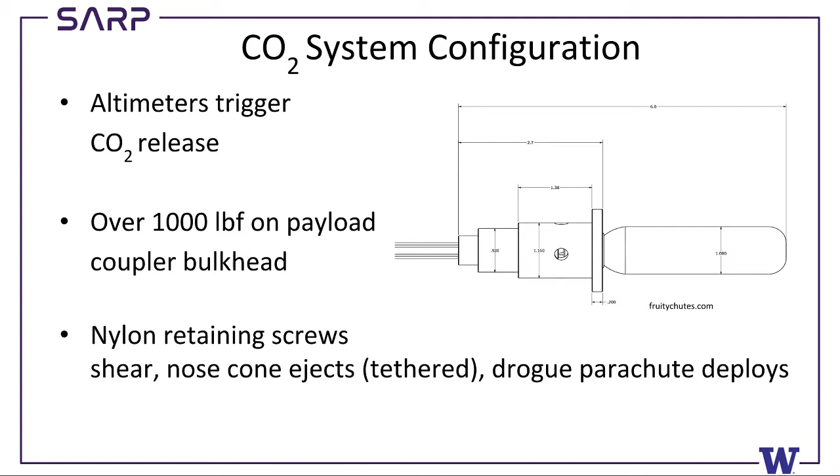This is just a little better schematic look at what the CO2 system looks like. There is a black powder charge inside of that left piece, and when it detonates, it sends a plunger into the top of the CO2 canister to puncture the diaphragm and vent the CO2 into the upper body tube. Again, this is very similar to what we've done and bought off the shelf in previous years, and we can still use that as a backup, but we want to make our own this year.

So that's how the nose cone is going to get off of the rocket, but the other deployment that has to happen is the main parachute has to get out.

While the rocket is falling under drogue, the main parachute is still tethered inside the rocket, and that tether is under tension. In order to let the drogue pull the main out of the rocket, we need to cut that tether. This piece is called the parachute stage separator, and it is a device to cut a tether under tension. The way it works is...

These rings provide an enormous amount of mechanical advantage, so this latch is held together by very little force. But when we remove that little force holding it together, it immediately separates. The way we did this last year was to cut a string with nichrome wire, which was difficult to manufacture and really fiddly to deal with.

This year, we're moving to an off-the-shelf pyrotechnic cutter, which will be able to cut our restraining line quickly and easily. It uses the same E-match setup that we're using with the CO2 system, and is just really cool because pyrotechnics. Like the CO2 system, this is triggered by the altimeters, and it will be triggered at 1,500 feet altitude, releasing our main parachute.

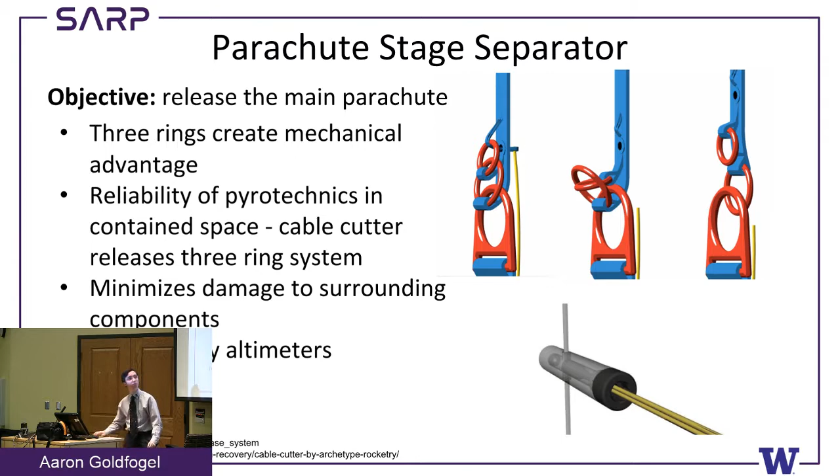Now we get into something I'm really excited about. I said we're going to be using circular parachutes, but what we'd like to do this year is replace that main circular parachute, the larger one, with a directional guided parachute, specifically one that is robotically, autonomously controlled. We've named that project Ares. The idea is to be able to guide our rocket back down to a chosen landing zone instead of wherever it ends up.

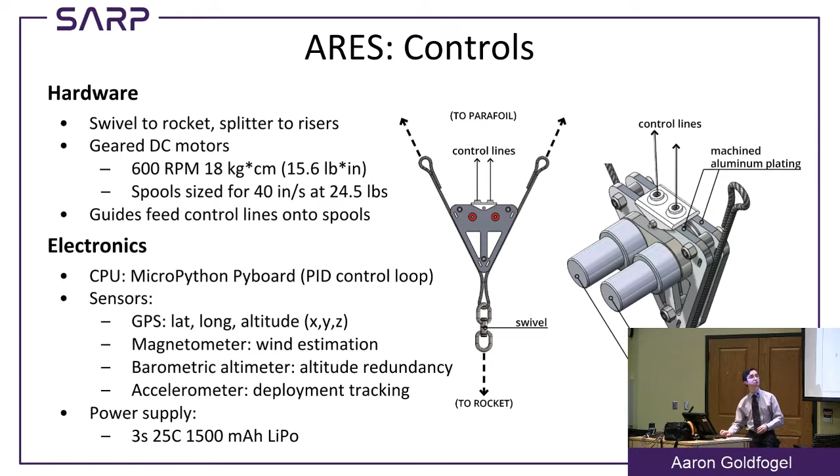There is the first part of the flight, which involves just beelining it for home. When we get within a certain distance of home that we know we're going to make it there, we start spiraling down to bleed off our excess altitude until we get pretty close to the ground. At that point we go exactly to where we want to land, turn into the wind, and when we think we're about 10 feet-ish off the ground, we're going to flare up the parachute—basically pull up, for anyone who flies planes—and sort of stall out right before we hit the ground, to hit the ground as gently as possible.

Another possible flight mode we're looking at is: what if the drogue parachute, the small circular parachute that deploys at apogee, fails? What if it does deploy but shreds, and we start falling much faster than expected? Well, an option is to deploy the main parachute and begin our flight, just ending up spiraling for a whole lot longer.

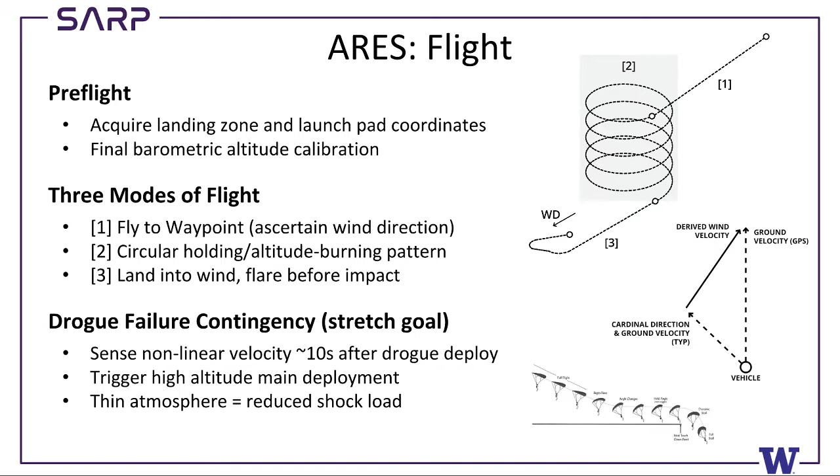Finally, our rigging of how we're going to rope the parachutes and all the other stuff to the rest of the rocket. Last year's system used a really cool rope that was great because it was light and strong, and terrible because it didn't stretch at all, which means it needs a lot of mitigating factors to lessen the shock of parachute opening and make the force on the rest of the rocket a little gentler.

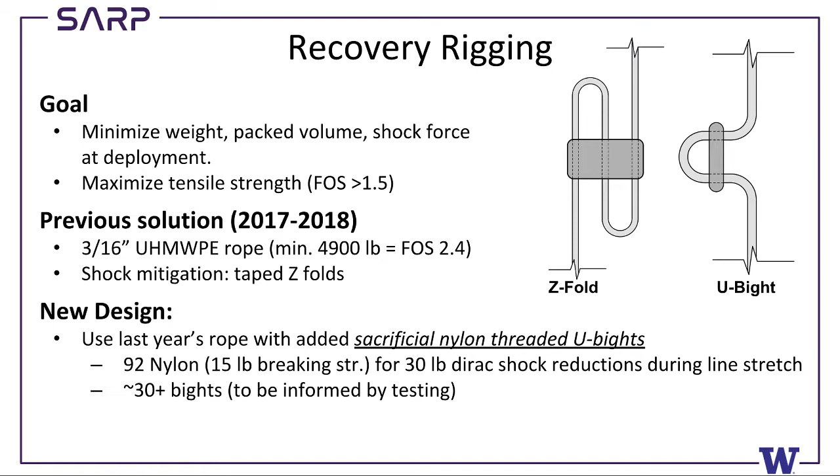Last year, we used Z-folds with a lot of masking tape, but we believe that wasn't enough shock mitigation because masking tape rips too easily. So we plan to also introduce U-bights, held together with about 15-pound test nylon string, which should take about 15 pounds to break. With 30 of them in a line, it should create one after the other 15-pound impulses when the parachute deploys, instead of one big one. That's all shock mitigation to make sure our parachute deployment is as gentle as possible on the rest of the rocket.

Finally, testing. We want to do a few different tests we've never done before, and the most exciting, I think, is dropping the entire recovery system out of a plane. We want to do this as a full test of main parachute deployment, which means pushing it out of a plane from a little higher than 1,500 feet, where we want our main to deploy.

Another test we are looking at is— oh wait, no, sorry, that's the one on this slide.

There are definite safety concerns about where we can do this. We're in contact with people experienced with skydiving and throwing things out of planes, people with planes, and airports, since skydiving generally happens close to an airport, and we don't want our robot parachute contraption to accidentally interrupt flight paths. Right now we have a prospective farm to drop things over, and we're looking for a larger, even safer location.

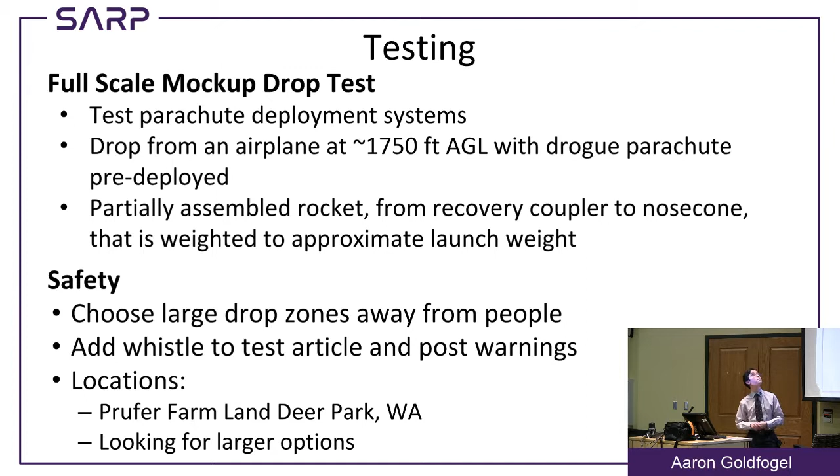The manufacturing will happen primarily on campus, which is something we're really proud of, and we're going to be using some really great facilities here for our various projects.

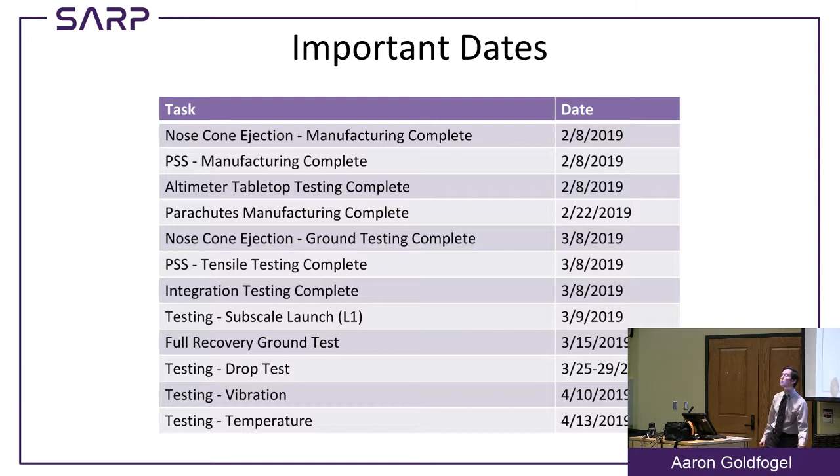Moving on, I'll just breeze through this slide, but the moral of the story is that we're going to be doing a lot of tests. A big focus on recovery this year is making everything as reliable and well tested as possible, so we're doing a ton of tests, ongoing ones, and it'll be a real headache to schedule, but we're working on it.

And that is it for recovery. So if you have any questions, now is the time. Yes?

So the question was about mounting the CO2 system very high up, and being worried about that mount being robust enough to keep all the parts in place. Basically, our plan is to make a very robust mount for it, and to make sure we've really explored the forces these cylinders and their mounts will experience in flight, especially during the acceleration of launch. The cylinders will be cantilevered a bit, so we need to know what forces to expect, modeled with finite element analysis and other analyses. We haven't done that analysis yet, and haven't nailed down the mounting structure's final look, but we have preliminary stuff that will be complete very soon.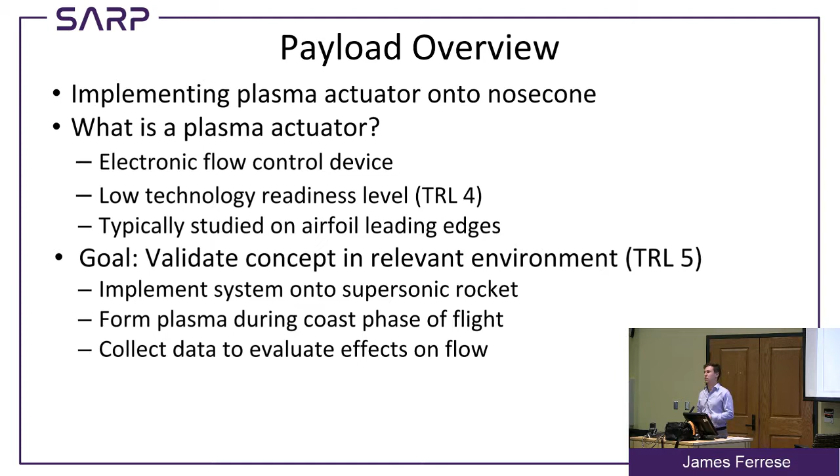This was something that really interested us last year, so we started doing some research, and this year we took it on as the main payload. There's about 20 undergraduates working on it this year, a big increase from about 6 last year. So the goal for the year is to validate this plasma actuator concept on the nose cone of a rocket in a relevant environment, i.e. atmospheric pressures. The sub-goals are to prove we can produce a plasma during the coast phase of the rocket and that the plasma had some actual effect on the flow.

So just real quick, how does a plasma actuator work? Here's a little diagram. The 4 key components are a power supply, 2 electrodes, and a dielectric in between them. If we apply a high frequency, high voltage signal to these 2 electrodes, we're able to break down the airflow over the electrodes and ionize the gas. With that ionized gas coupled with the electric field between the electrodes, we're able to impart a body force on the neutral air particles, creating net momentum, and we can essentially control flow.

These pictures here are a before and after example on an airfoil. You can see all the turbulence and flow separation with the plasma actuator off, and how greatly it's changed with the plasma actuator on. There hasn't been much research, like I mentioned, with nose cones, so we're really looking into that as well.

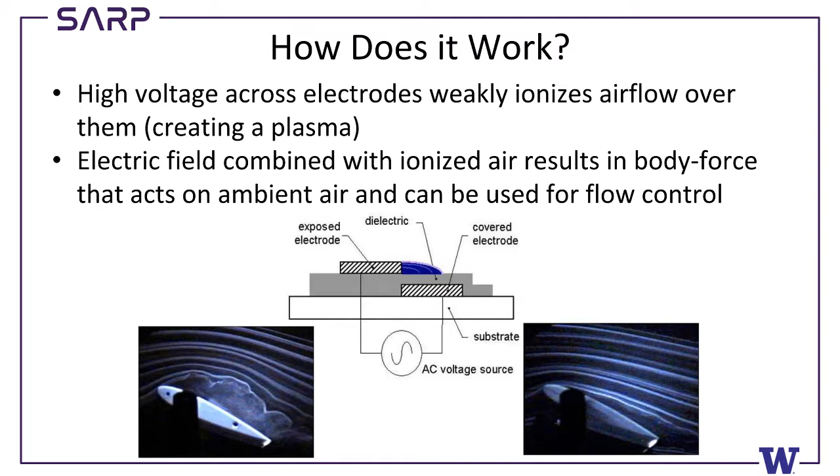So the first aspect of this system is the structural aspect. We've got to hold everything together. We have a team working on that, and the 3 criteria are: we wanted to fit into a 3U CubeSat form factor, the cage had to act as a Faraday cage to block out electromagnetic interference in the RF spectrum. We get a lot of RF interference from the plasma itself, and because our electronics are so close, right on the nose cone, we needed to protect them from that EMI.

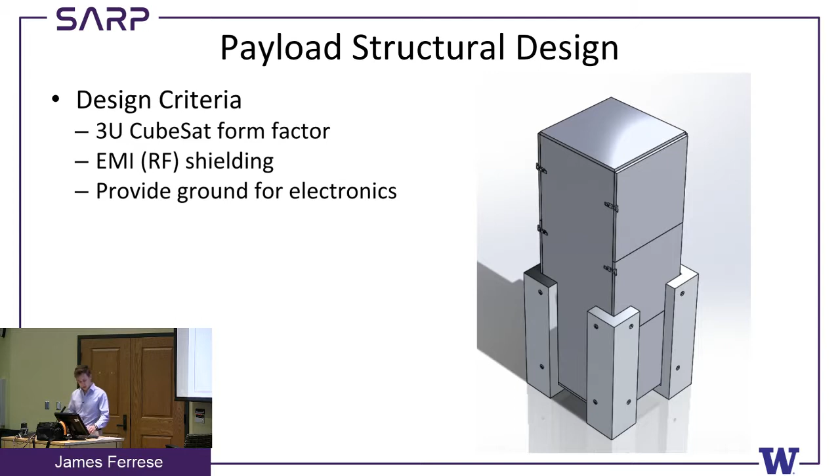And then finally, it needs to act as the ground for our electronics. So we decided on aluminum for the material. It's highly conductive, so it'll work well as a Faraday cage and for our ground. And it's strong. We'll have an access door here to easily access our electronics. We'll have the power supply in here, as well as some controls electronics down below, held on shelves. All components will be manufactured in-house, though it's possible we might outsource the aluminum welding, since that's kind of hard.

So analysis of the structural aspects: we basically chose the thickness of the aluminum case based off the EMI shielding requirements, as well as structural requirements. We did some quick hand calculations, assuming a total weight of about 10 pounds and a total max acceleration of about 10 Gs, and found that our stresses within the cage were well under the yield stress. But we're going to keep doing some FEA, hopefully completed by CDR, to support those claims.

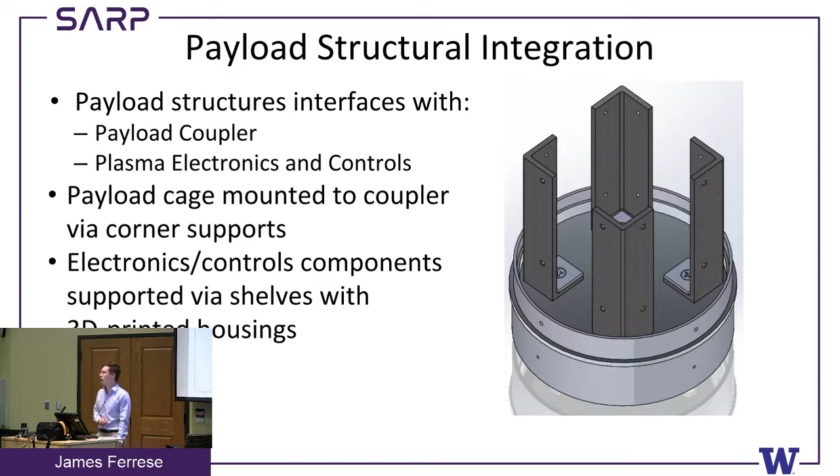Integration-wise, we'll be integrating with the payload coupler. There'll be 4 corner supports that we'll use to screw in the cage itself, and that'll hold it rigidly in place on the payload coupler. They'll also be integrating with the plasma electronics and controls teams, which I'll talk about in a bit.

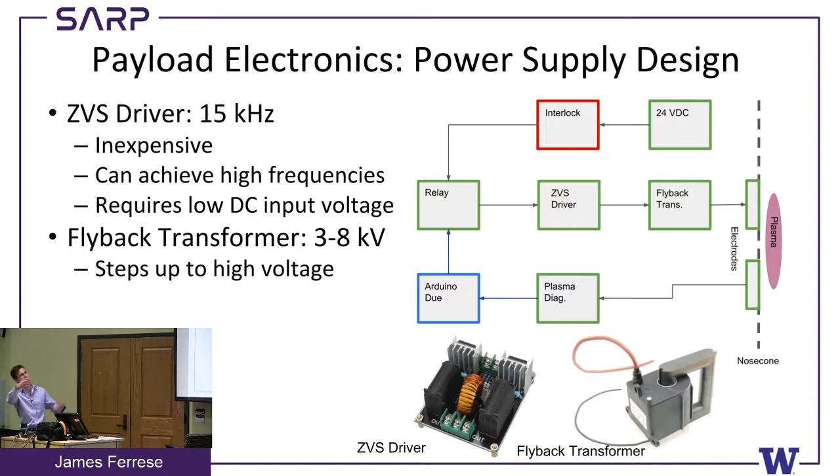Going into more depth on the electronics, there are 2 main aspects we spent a lot of time on: the power supply, and the electrodes. These 2 components constitute our power supply, and here are our electrodes, which are really where the plasma gets formed.

The 2 components that make up the power supply are: first, the ZVS driver, which is a really cool circuit - essentially you can feed in a DC voltage and it outputs a very high frequency AC. We'll get about 15 kilohertz from that, which is within the operating range of the next component, a flyback transformer. From there, we're able to step up from 24 volts to anywhere between 3 and 8 kV, depending on how many windings we put on the transformer. So with those 2 things combined, we can convert a 24 volt DC battery pack signal and output a 15 kilohertz high voltage signal to these electrodes.

Just a couple things back on this: both of these components are pretty small and lightweight, so we needed something that would be easily integrated into the nose cone. This fit the bill for that.

The electrode design is the next key aspect. We had to work closely with the nose cone team. As you can see here, there's actually a small inset within the nose cone in which we're going to place our electrodes. The main criteria were: we wanted to make sure the electrodes were flush to the nose cone - we didn't want to trip any flow prematurely. We wanted all the change in flow characteristics to be due to the plasma itself, not any physical bumps on the nose cone. We also need this buried electrode, the aft electrode, to be under the dielectric.

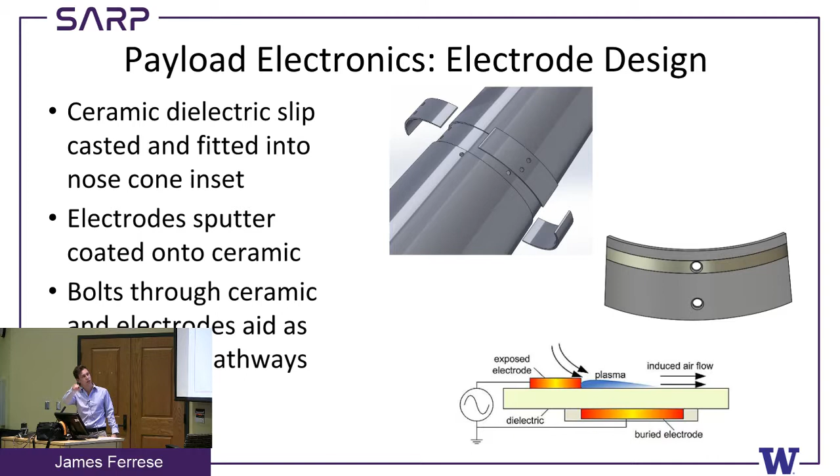To talk more about the manufacturing, the dielectric we went with, modeled here, is this quarter cylinder shape. It's actually a ceramic, which will be slip casted in the MSE department. We chose that based on its dielectric properties. The electrodes are going to be sputter coated here on campus - it's a really cool process, almost like spray painting with copper, and we can get a really thin copper electrode that way, so we don't have any standoff from the nose cone and don't trip any flow. We'll have some conductive bolts that go through the ceramic and the electrodes, which help adhere the electrodes to the nose cone and aid in conductive pathways - that's how we get the signal to the electrodes themselves.

Just quickly, the integration. So we work with the nose cone, like I mentioned. We want to make sure that the insets that get added to the fiberglass layup fit perfectly with our ceramics. We want to minimize the amount of holes that end up going into the nose cone. We don't want to turn it into Swiss cheese.

And then we need to ensure that the temperature through the plasma will stay within the operating temperatures of the fiberglass. So we'll do some tests for that.

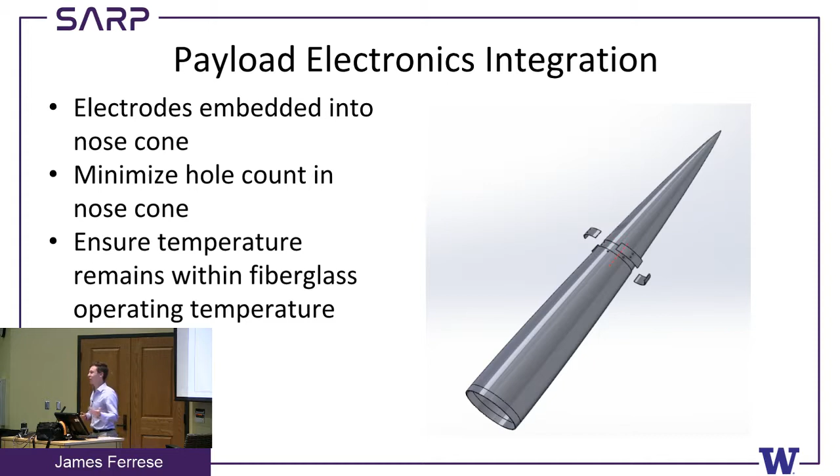We also integrate with and affect the avionics team, because like I mentioned, we have a lot of EMI. That doesn't work well with the avionics electronics, especially because they're trying to send and receive signals. So they can't necessarily put their electronics in a Faraday cage like we can.

Okay, going on to the diagnostic side of things, this is how we're really going to be able to tell what effect the plasma had on the flow.

So we want to be able to quantify that effect. So we decided to choose heat flux sensors to do that, mainly because they're relatively cheap, had a really high measurement fidelity, and were flat to the nose cone. They minimally disrupted the flow.

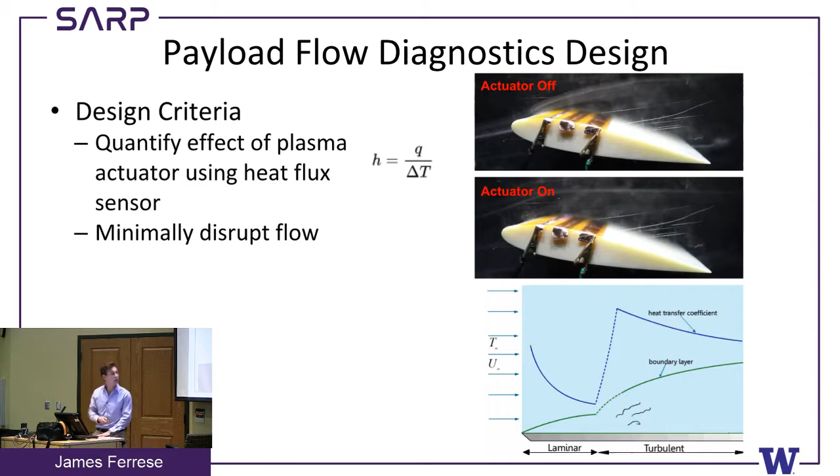This is a little bit more about the heat flux sensor. We were originally going to go with piezoelectric pressure sensors, but they didn't have the high enough fidelity to really measure the differences between what was going to be happening between laminar and turbulent flow.

We're going to be doing some CFD, we've already started it, and some wind tunnel tests coming up next week to determine the best place for these sensors where they're going to be located on the nose cone. One other benefit to these is that they're really easy to integrate with the Arduinos that are in our control system, which is what I'll talk about next.

So the diagnostic team integrates with the controls team, and the controls team is in charge. Really, the diagnostics are the sensors for the Arduinos, and the Arduinos are the controls team.

Talking a little bit more about them, their design criteria is threefold. First, they need to be able to detect when the rocket enters into that coast phase. At that point, they're going to send a signal to an electronic relay, and that will turn our circuit on and help us create plasma.

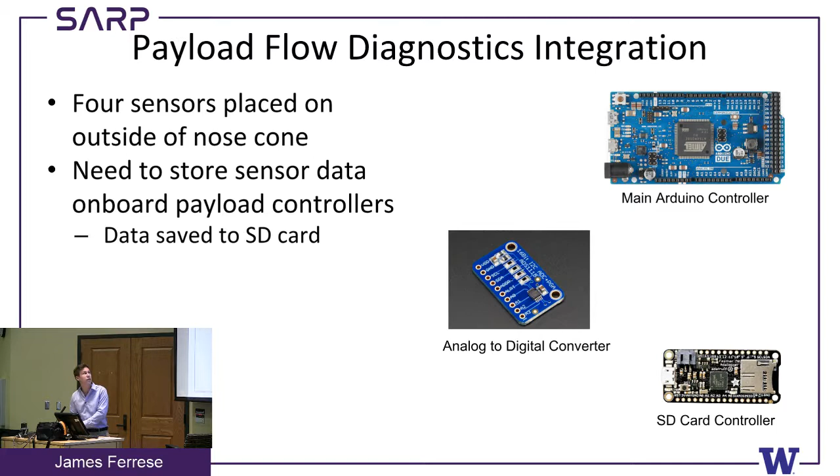And then after a set amount of time, then we'll turn that circuit off. And then the last thing is it's going to be logging the data that we're getting out from those sensors from the diagnostic team.

Here's kind of a little schematic, and I'll talk about that next.

The main control algorithm we'll be using is something that's never really been done on our rocket before, called in-flight failure checking. With that comes an array of altimeters that will constantly be comparing their signals to each other. The Arduino primary controller will use the differences in error to determine the best time to turn on once we've entered the coast phase. It's a challenge the controls team wanted to take on—they said, we don't want to just use one altimeter, let's use 4. We said, all right, let's go for it, that's awesome.

That'll be running on the primary controller, which will also be powering the electronics and reading in the inputs from the diagnostics team. The primary controller will be talking to a secondary controller, which will be in charge of storing all the data we're getting from the diagnostics team locally on board on an SD card.

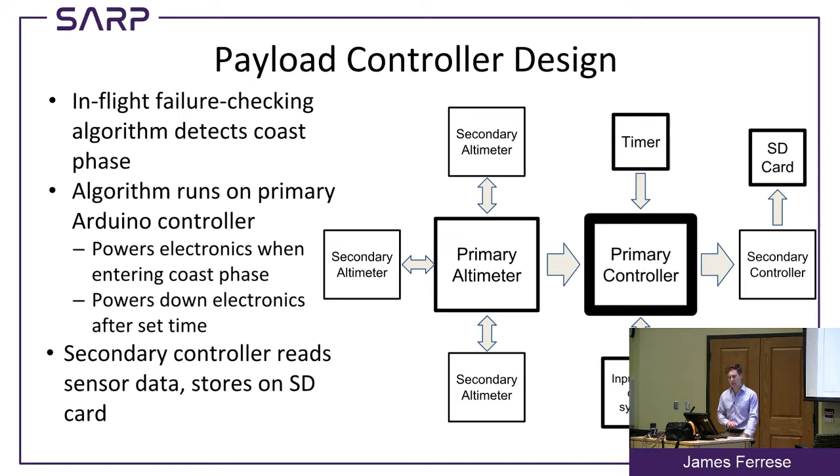So I mentioned the controls team needs to read and log heat flux sensor data. They also need to log some voltage data from the electronics team, and you'll be working with the electronics team to activate that relay. There's also a possibility that the nose cone team will be adding a pitot tube to the nose cone, so we've offered to help them out—we'll be reading in their data too and storing it locally on our controller.

So testing-wise, I'll briefly mention some of these. The first test we'll probably do is after the support cage gets created—we're going to do some Faraday cage testing. Does it in fact block out the EMI?

We'll do some plasma formation testing once we get the circuits made. Once we get plasma formed, we'll move into the next two bullet points: heat transfer testing with the nose cone team, and avionics EMI testing. We want to make sure that at the distances they're set at, we won't get any interference.

This one's pretty cool—the controls team is going to strap their controller onto a drone and send it through a bunch of different varying accelerations and altitudes to see if they get the expected behavior out of their system. The last two are once we incorporate all these systems together: we'll do some vibrational testing, and once implemented into the nose cone, hopefully we can do some wind tunnel testing to analyze on the ground how this plasma affects the flow.

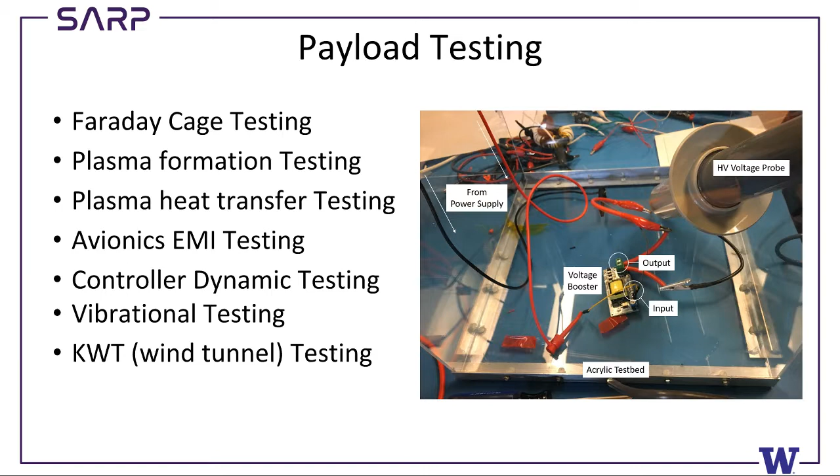That's it from me. Do you guys have any questions on the payload? Yeah, Oliver.

Right, yeah, so we have thought about that. The question from Oliver was about the pitot tube and heat flux sensors necessarily being outside of the Faraday cage—how are we going to protect them from the EMI? That's something we're still working on. The first main way of combating that is to protect the signal wires in a mesh conductive material, which can keep out interference along the wires. We're also looking into ways of minimizing the actual interference on the very surface of those heat flux sensors, but the majority of any area where it can be affected is going to be shielded.

The question was regarding the heat flux sensors - were those measurements at a single position at a single point in time, or spatially and temporally dependent? There will be 4 heat flux sensors on the nose cone: 2 before the plasma actuator and 2 after, with 2 just for redundancy. So spatially, there will be 4 different locations, and they'll be measured as a function of time. We'll have a change in temperature out of this thermocouple, and then a change in heat flux as a function of time.

We still have the safe testing box, and we've updated our SOP to be safer. We're going to add an interlock system as well as a manual switch. There's also a whole bunch of personal protective equipment we've added, and we're going to try to have a professor or somebody well versed in high voltage electronics present at all of our testing, because safety is our highest priority.